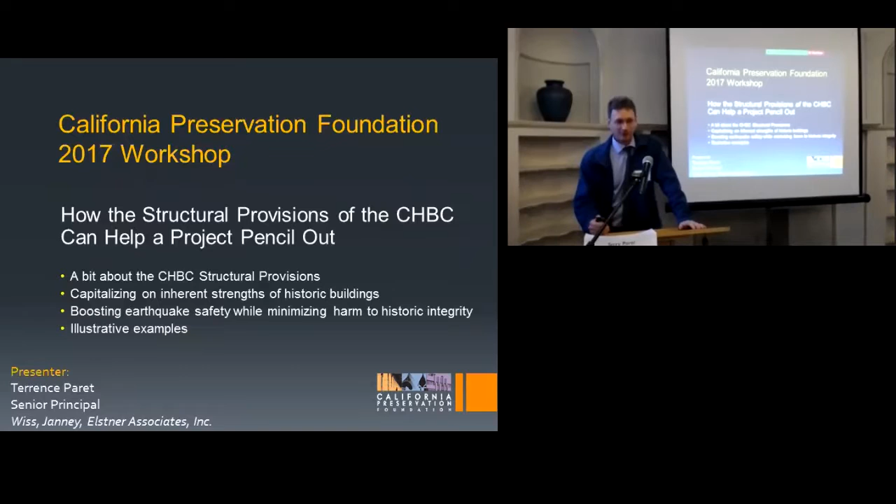That's exactly how I'm going to address the global subject. I will tell you at the outset that I don't have a particularly prescient set of messages for you today, because I think the messages are pretty obvious. These aren't things that I've invented.

These are strategies for achieving success in seismic projects on historic buildings that involve different ways of making things less expensive. It should be very clear from the outset that the more structural intervention we do on historic buildings, the more it's going to cost, the less likely it is to pencil out. So the practical reality is that we should target all our energy on figuring out how to reduce the level of structural intervention that's required.

Luckily, the CHBC gives us lots of ways to do that. As part of that, we need the entire preservation community to understand that preservation is not subordinate to seismic safety. It's often taken to be subordinate on real life projects—we see it all the time—but it's not subordinate. The reality is they're equal partners in things.

The reality is that engineering for seismic safety involves an interaction between seismic safety and preservation. Even in the engineers' quarters, where there ought to be an interaction, there needs to be kind of a handshake between the two, and I think unfortunately there isn't.

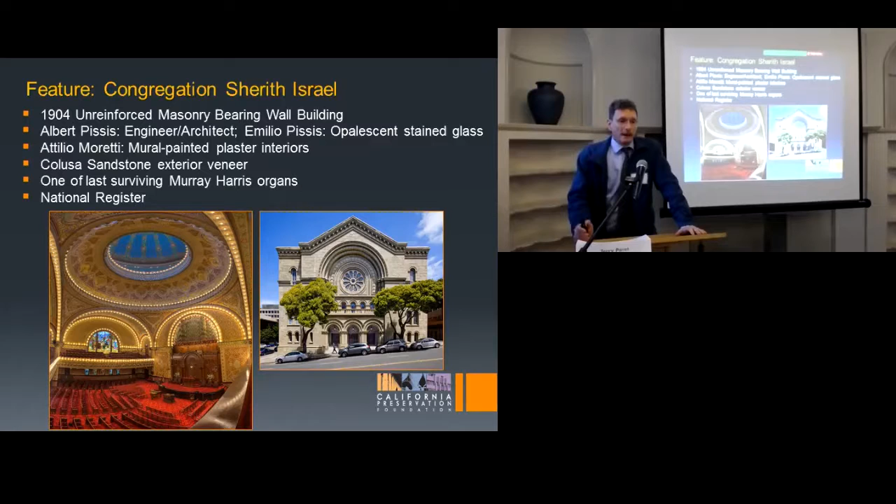Without reading through all its merits, I'll point out that the image on the left could have been taken either before or after the work we did. We didn't touch this—anything you see in this image was really not touched during the seismic upgrade. This building is now compliant with city requirements. There are ways to make this work in real life.

Also, the Hibernia Bank building—both these projects, by the way, are just completing right now. Again, the image on the left could have been taken either before or after the seismic strengthening work. In both these buildings, something like 70% of the volume is contained in these giant halls—the sanctuary in Sherith Israel. We stayed out of those areas, and as a result these projects work. They were successful from beginning to end, and they were cost effective.

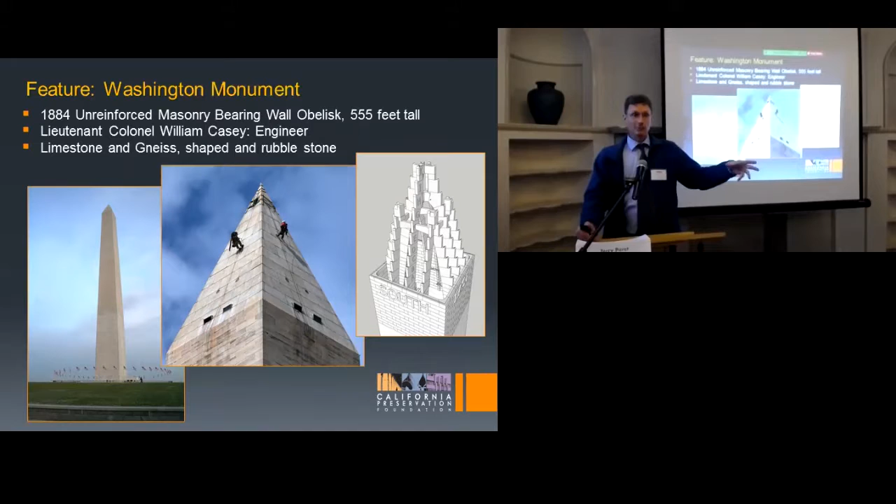Now, the Washington Monument, similar in a different sense, is not subject to the CHBC, obviously, but there are certain things we did on this project that I think are relevant and can be done under the CHBC, so I'll mention those as we go along.

Okay, look—a few things about the CHBC structural provisions. There's going to be a little overlap here between myself and Alan, but I'll try to pop through those things pretty quickly.

On the first slide, it tells you where the structural provisions live: chapters 1, 2, 7, and 8, or at least the structural requirements.

What's important here is, as Alan said, to understand how to read the CHBC. It's not our job to go fishing around in the CHBC looking for requirements that appear to apply to our project. That's not how it works. You start in chapter 1 and figure out where chapter 1 directs you for the project you're involved in. If you fish around and try to pull out provisions that appear applicable, you're going to be doing more work on your building than you actually have to, because there are things in there that appear applicable to lots of projects but aren't.

So start at chapter 1 always and look for the charging language, which in some places is obviously absent. Which is interesting.

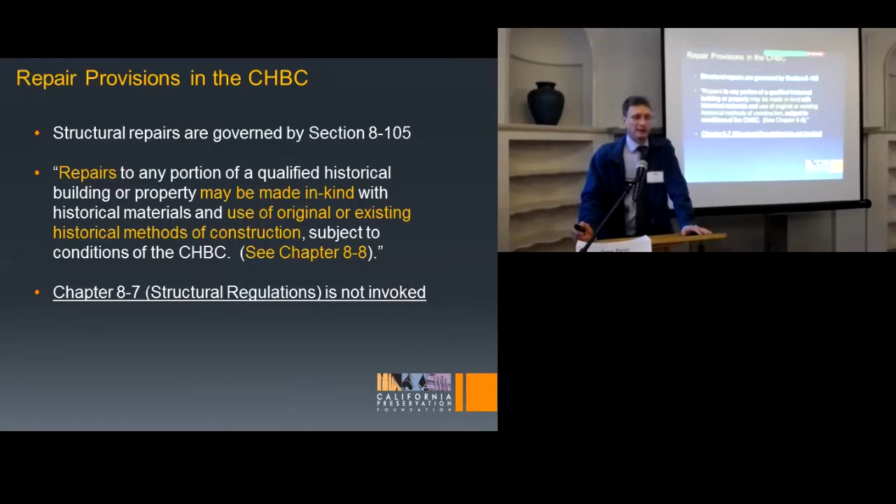Structural repairs, I think Alan already mentioned this. You can make them in kind. That's it. You have a structural repair project in a historic building, you can make them in kind. You are not required in any way to go to chapter 7, where the structural regulations reside in the CHBC.

Unsafe conditions, Alan already mentioned as well. Again, it's important to understand two things, and I'll emphasize Alan's point because I think it's a great one: don't let engineers or building officials tell you that buildings are unsafe under the code because they don't comply with the seismic requirements. That does not make a building unsafe. In any case, with respect to unsafe conditions, you can just remediate those unsafe conditions and you do not have to go to chapter 7 of the CHBC.

Voluntary strengthening is also a fascinating part of our CHBC. It's important to note that just because you're doing voluntary strengthening, you don't end up in chapter 7, in the structural regulations. There's no path to chapter 7 in chapter 1.

It's very clear, however, that the code does say that nothing in these regulations shall prevent voluntary and partial seismic upgrades when it's demonstrated that such upgrades will improve life safety and when a full upgrade would not otherwise be required. The point of that provision, in keeping with the general philosophy we use in these projects, is that if we target critical vulnerabilities in historic buildings when looking to seismically strengthen them, and limit ourselves to critical vulnerabilities, we can save a heck of a lot of money and reduce a heck of a lot of intervention, and the code explicitly allows us to do that.

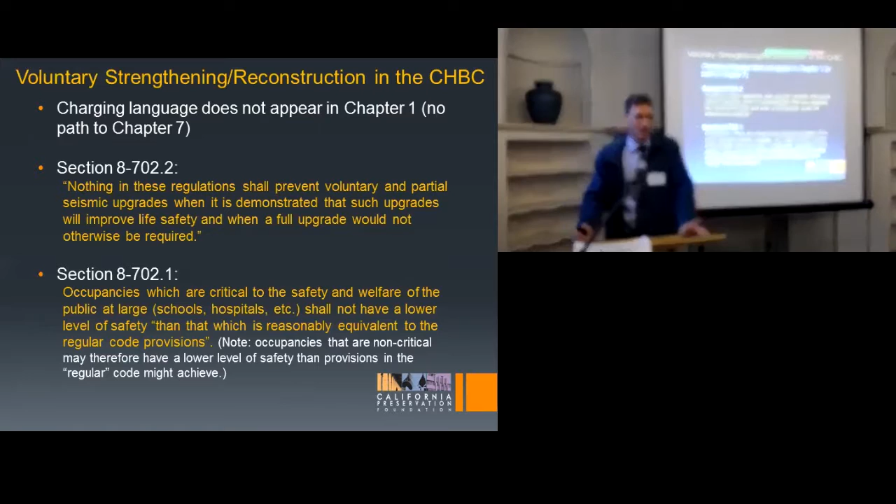On a voluntary basis, when we're involved in a voluntary strengthening project, we don't have to do everything. If we can solve 80% of the problem for 20% of the money, why wouldn't you just do that and stop there? So anyway, it's an important lesson. The code allows us to do that.

With respect to change in use, as you probably are aware, many people consider change of use as a trigger for upgrading buildings. It is a trigger in the CBC, but it's not a trigger in the CHBC.

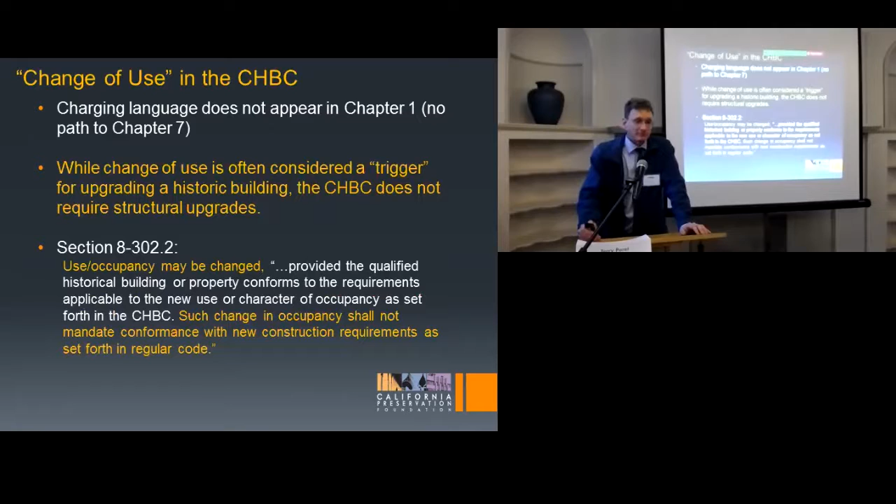Additions, similarly, I think the lesson with additions, if you read these provisions, is that you should try to keep your addition structurally separate from the historic structure, because if it's touching it and either takes load from it or adds load to it, you wind up with all sorts of problems. The language is pretty clear in the code, and I think the lesson is pretty clear: if you need to make an addition, keep it structurally separated.

Mandatory strengthening is where I actually wish the CHBC had slightly better language in it. But understand the motherhood language: for mandatory strengthening, you have to go to Chapter 7. Really, there's no other place to go in the code, even though the code doesn't actually say you have to go to Chapter 7 - we infer it because there's really no other way to interpret it. But Chapter 7 clearly says that the intent of the chapter is to encourage preservation with the objective of preventing partial or total structural collapse, such that the overall risk of life-threatening injury as a result of structural collapse is low.

So again, it's kind of focusing us on this notion of structural collapse. It's not asking us to look at every little item in the building that might fall down.

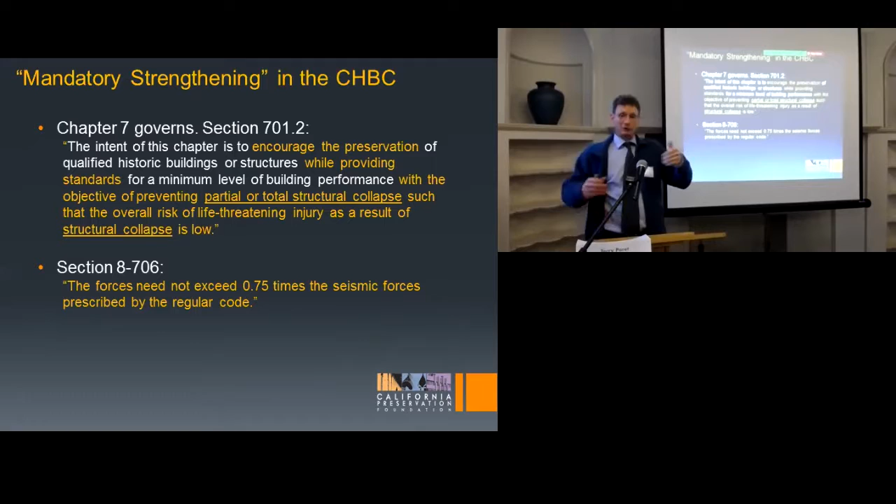It's not saying you shall prevent all brick fall. It says you shall prevent structural collapse, such that walls collapse and floors thereafter collapse. Not local brick fall—that's not really on our radar.

In any case, the CHBC allows us to reduce design forces from the standard code to 0.75 times the forces.

Let's talk about the heart of the talk, which gets into capitalizing on inherent strengths of historic buildings. To capitalize on inherent strengths, the structure must have inherent strength. If we have a structure that doesn't have any—is there such a thing? No, there's no such thing as a structure that doesn't have inherent strengths.

Knowing that every structure has some sort of inherent strengths, our job is to identify them, quantify them, because as engineers, everything has to be quantified, and to leverage them in the final design.

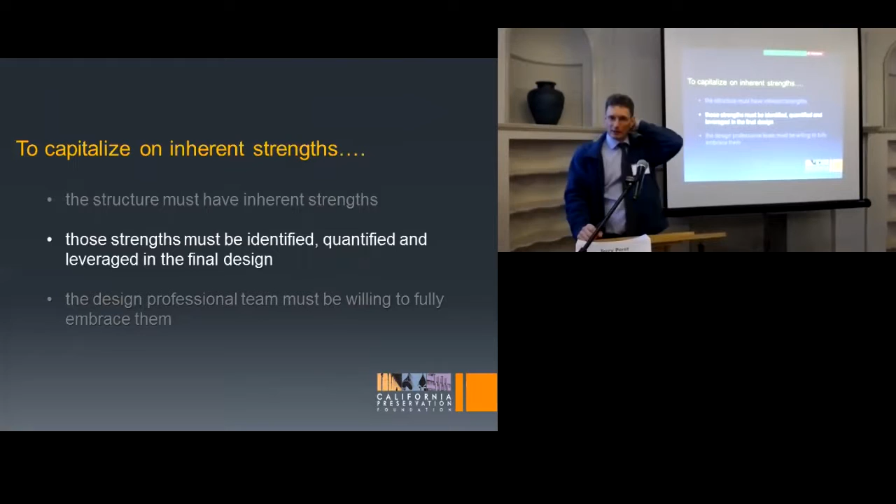I'll give you some examples about leveraging inherent strengths, because you don't always get exactly what you want in a historic building, and some historic buildings have fewer inherent strengths than others. But our job, if we want to help projects pencil out, is to figure out what they are. Don't give them too little credit, don't give them too much credit, but give them credit.

In order to capitalize on inherent strengths, this last bullet is perhaps the most important: everyone on the team has to embrace this philosophy. If you have one rogue team member—even the municipality, I consider a team member here—they're either with you or against you.

Everybody has to be committed to the notion that inherent strengths in historic buildings are reusable, that we can use them in a current scheme of seismic resistance. We just have to figure out how much we can use them and where. But if we decide at the outset not to use them, there goes the project.

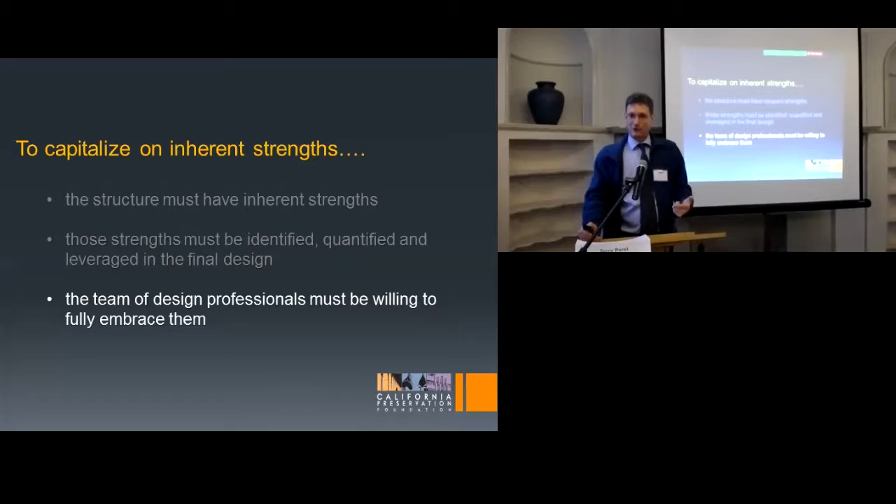So, does the structure have inherent strength? Yes—there's really nothing else to say. So how do we go about identifying, quantifying, and leveraging the inherent strengths in a historic building?

I've itemized a few ways of doing that here—again, none of these things are things you don't already know. But I'm going to show you some pretty pictures while explaining them, and maybe that'll make it up to you that I'm telling you what you already know using nice pictures.

First, archival research. Historic buildings—the older they are, the more historic they are, the more stuff there is out there that can tell us about them. Not just what they were used for, but from a structural perspective, things engineers can actually leverage if they knew about them. Engineers may not be great at research, but somebody's got to do it. You have to figure out who on the project team will be charged with that.

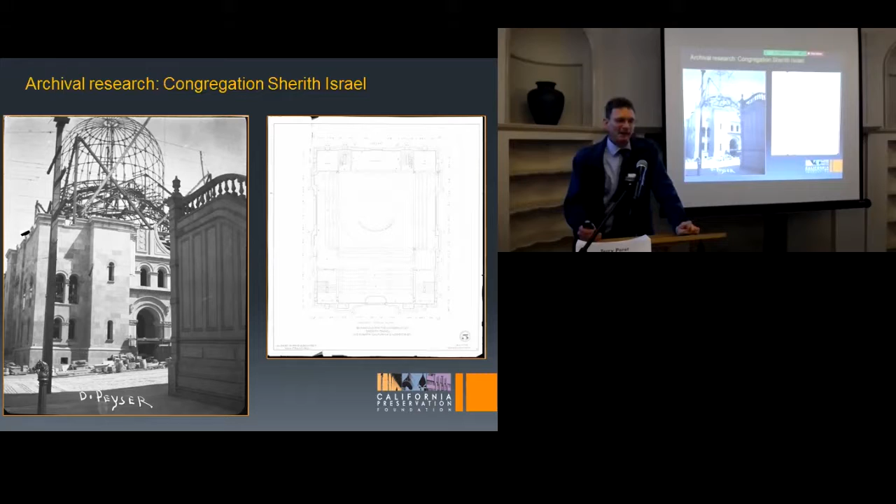We did have a few drawings. On the right is an image of an Albert Pissis architectural drawing. We had a handful of Pissis's architectural drawings that showed us where the structure was, but didn't really define the structure very well.

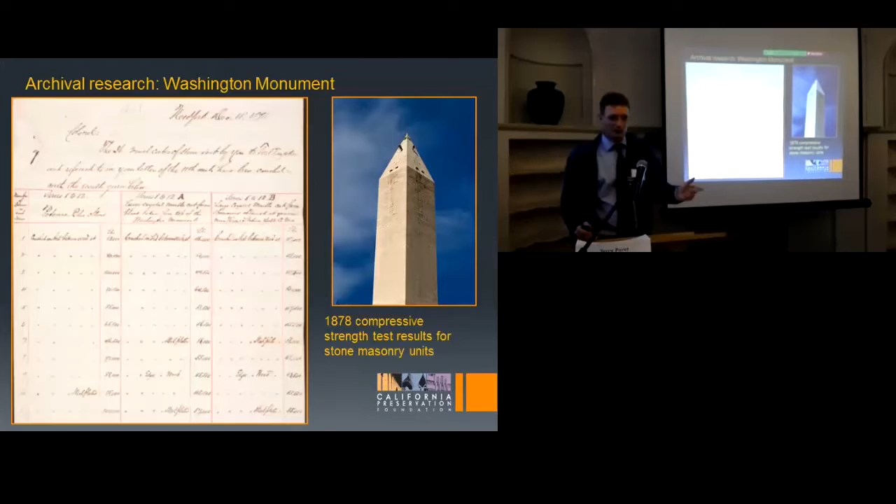On the Washington Monument, archival research, as you might imagine, was—well, you could retire doing archival research on the Washington Monument. Just great, great stuff available. The image on the left is a sheet that records the compressive strength of the stone used in the monument. Just a ton of really, really cool stuff.

This is one of my favorites, but you kind of have to be a geeky engineer to appreciate it. In the old days, engineers didn't have calculators—they could do long division, but no calculators, no computers. Engineering methods were largely graphical. This is one of Lieutenant Colonel Casey's sheets, the design sheet for the Pyramidion on top of the Washington Monument.

It's really hard to see here, I know, but you can see a bunch of paraboloid type shapes. This is his graphical solution for how the loads get transferred and carried in the Pyramidion for wind out of plane.

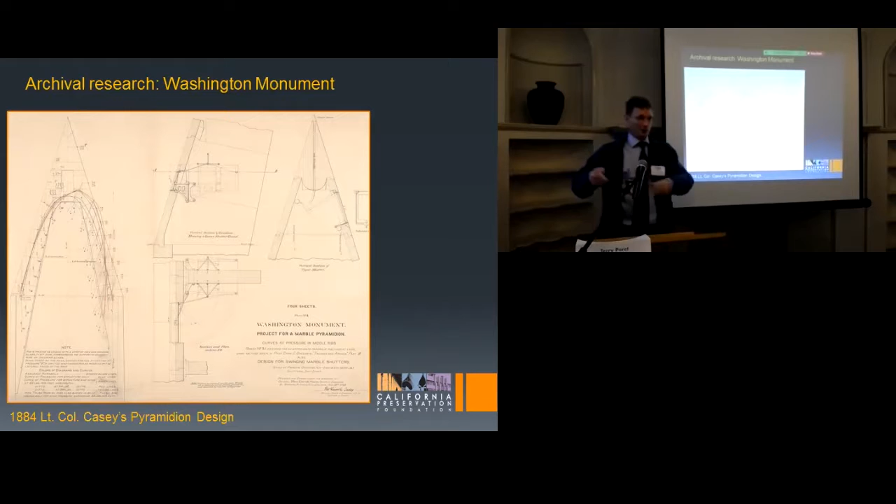What I love about it is there are notes on here. If you follow the chain, as all archival research does, you figure out he's thought about what other means of structural strength are needed if wind pressures exceed certain amounts. He references certain textbooks, still available, that we were able to find and reference, so we understood what he thought about the design at the time. That goes for Lieutenant Colonel Casey and for Albert Pissis. There were a lot of really smart engineers back then who designed very competent structures without benefit of computers.

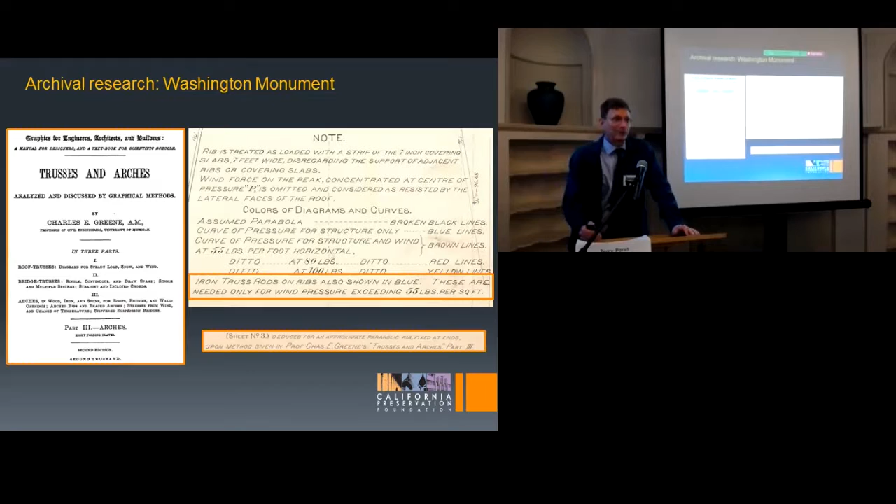Okay, so a little more about what we can do to establish our inherent strengths and quantify them. Obviously field observation is a huge part of it. You might find yourself in some awkward positions at times, but you can learn a lot.

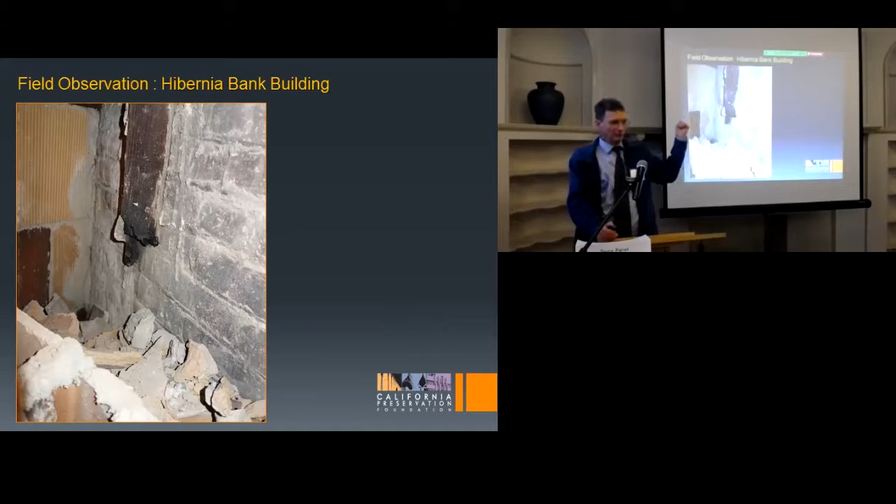These are images from the Hibernia Bank building. I suspected when we first became involved in that project that the partitions and the like had all been wood framed prior to the earthquake and conflagration, but I had no proof of it because we had absolutely no drawings for Hibernia. But in rooting around in the building, I found burnt timber that I think was part of an old partition. I think at Sherith Israel, everything is done in wood also, and I think Pissis did this building in wood but made it fireproof after the conflagration by rebuilding all the interiors back in hollow clay tile, which was lovely.

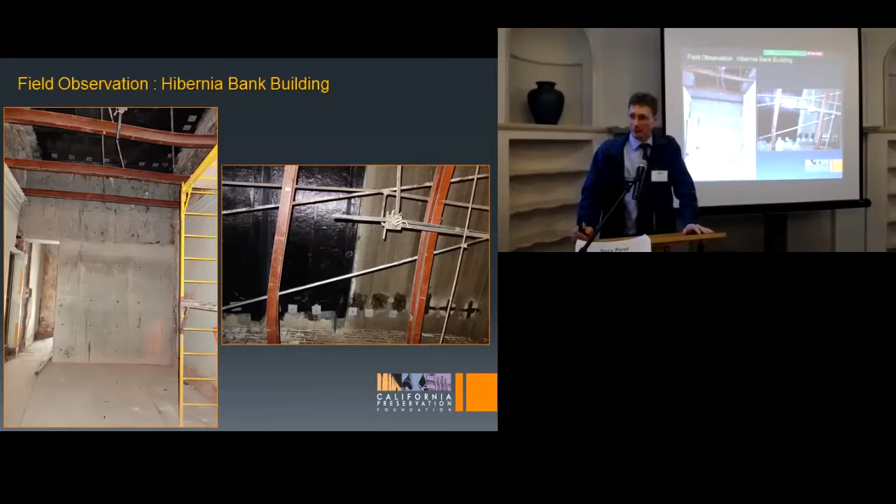We also found, very interestingly, other signs from the conflagration. These are steel beams in an area I call the bookend, that we'll describe in more detail later. These steel beams are actually warped by the fire. Our conclusion is the steel beams heated up, got weak, the material weakened, and as they expanded they were not allowed to by the masonry walls, so they buckled.

The same thing happened up in the attic. The main roof of Hibernia is supported by steel trusses. What you see here is the bottom chord of one of these steel trusses actually bent. Somebody later came in and infilled the area with concrete to prevent it from buckling further, which is actually quite a clever solution. We don't know who did it or when.

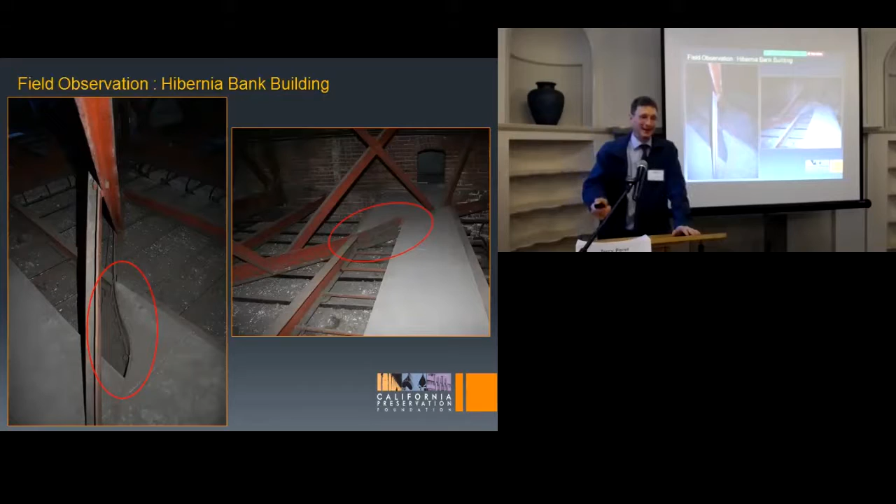Too often these testing agencies will come out to your site, do tests, give you numbers that don't make sense, and now you've spent a bunch of money and have numbers that don't make sense. It's very important to make sure this stuff is calibrated before it takes place.

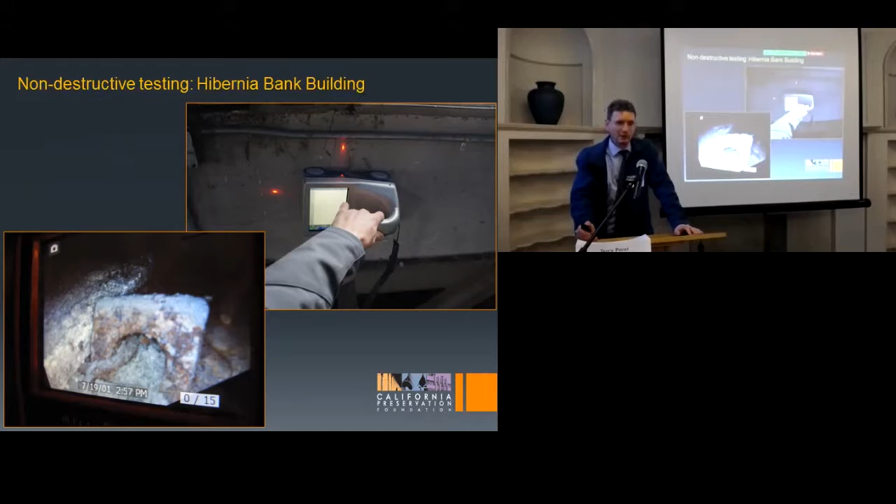We go to great lengths to use non-destructive testing in our projects where applicable. The image in the upper right is ground penetrating radar. It works wonders on things. At Sherith Israel, we were able to locate all the veneer anchors and their pattern. Sherith Israel has a Colusa sandstone veneer, and we were able to understand whether the veneer was appropriately anchored and supported or not. But perhaps more fun, here's an image of a gentleman running a GPR over the cornerstone for Sherith Israel.

There had been a long reported rumor within the congregation that there was a time capsule buried behind the cornerstone. In concert with the facility, we arranged to do some ground penetrating radar and see if that rumor was true. Lo and behold, it was, and the time capsule was right behind the stone in the area outlined by the orange box. So we measured out where that was, went to the interior, tore out some of the partitions, yanked out the time capsule, and now they have it, which is pretty cool.

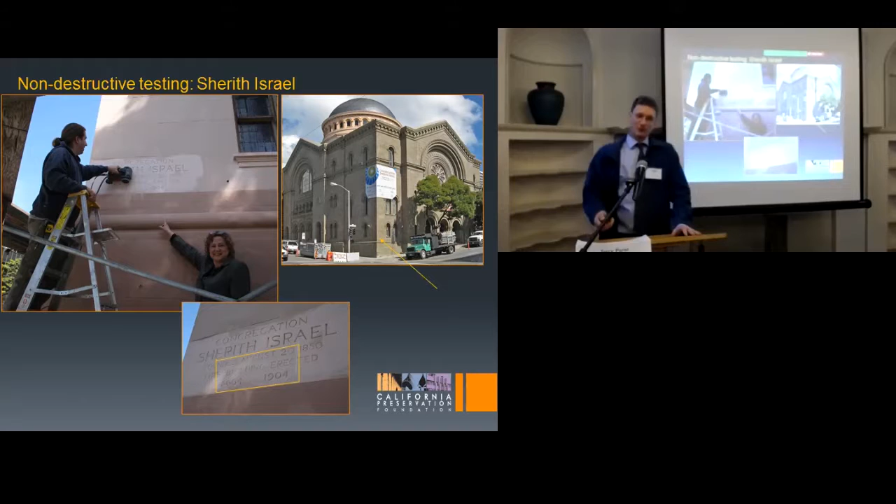And all without doing any damage, right? We obviously didn't want to damage that cornerstone. Okay, that's destructive and non-destructive testing in concept.

You have to be willing to, sometimes you've got to do some damage to stuff. And you end up with a matrix of what's the biggest bang for the buck. Where am I going to get the most information for the least damage?

This particular building was not on the city of San Francisco's unreinforced masonry building list. So we didn't know at the outset of this project, was it an unreinforced masonry building? Was there a steel frame hidden somewhere in here? We absolutely had to find out. This was a key issue in the tree of decision making.

So we made a bunch of these holes, and we of course discovered that this is an unreinforced masonry building. There is one portion of the building, kind of an internal second floor that's supported by cast iron columns, but the bulk of the building is all unreinforced masonry.

Don't be scared to drill holes. Sometimes you can get a lot of information from them. Just be careful how you do them.

Benchmarking is something that I really want to emphasize for you guys, and it's pretty engineering-y. But the point is to try and figure out how to use the fact that these structures are historic to your advantage. Because they're historic, they've been through a number of loading events - they've seen large crowds over time, they've maybe seen earthquakes, they've seen big windstorms. Those loading events can help us quantify what the structural characteristics of these buildings are. How good are they? How bad are they? Where are they most vulnerable?

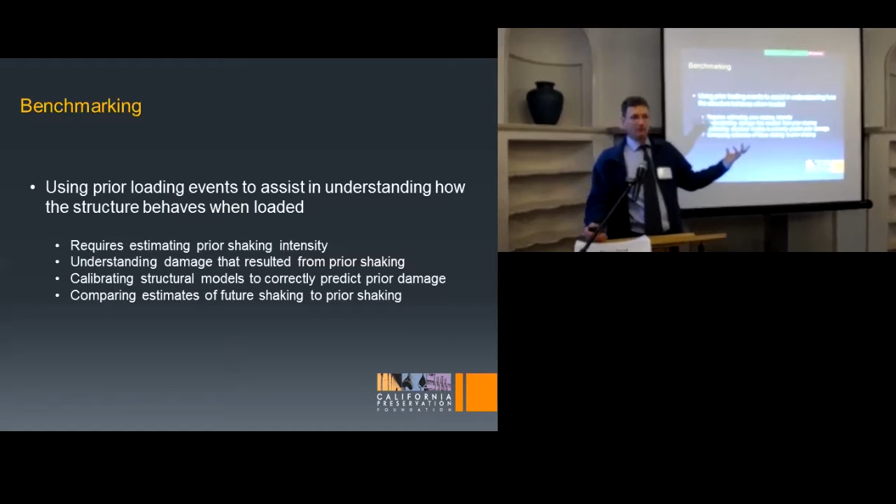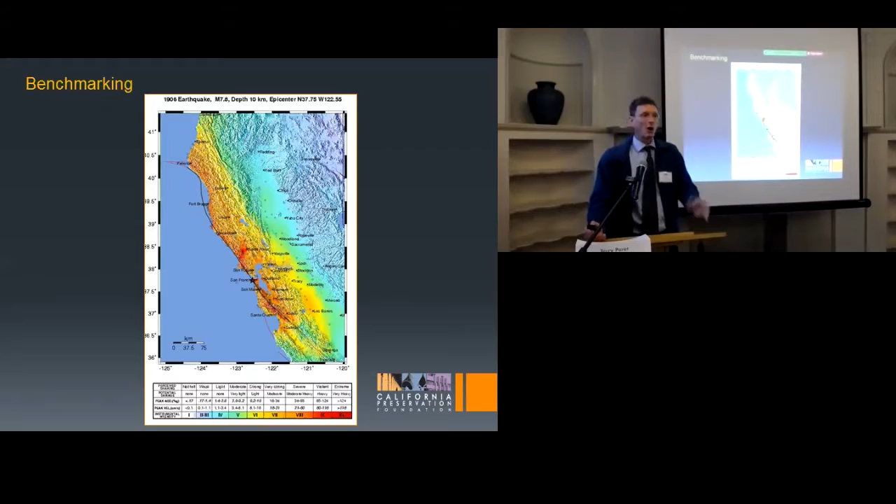So there are ways, particularly in earthquake land, of leveraging this information. For San Francisco, we have lots of information from the USGS that helps us characterize what the intensities of ground motions were back in 1906, which for any building that was around that time and went through it, can give us an awful lot of information, both conceptually and on the analytical side.

Anyway, benchmarking - benchmarking and archiving kind of go back and forth, everything's hand in hand. You look at photographs as part of the benchmarking process if you have photographs available.

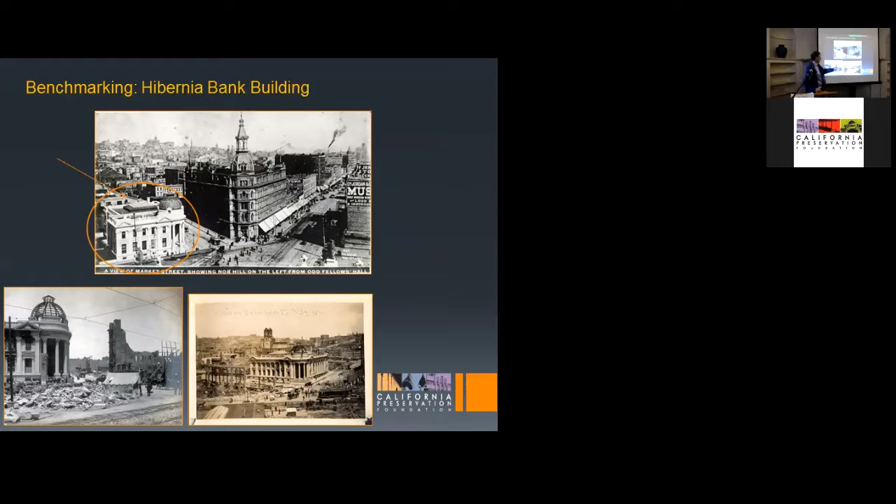Here's Hibernia. I just want to point out, in the top slide, this is Hibernia before it was expanded in 1904 - notice this building across the street. On the lower part of the slide, there are two images of Hibernia after the fire and of the neighborhood, and you'll see that the building across the street is down as well. Just keep that in mind for a second.

But the images of Hibernia really helped us understand how it worked in 1906. What we see is that structurally, it really wasn't damaged by the shaking, it was damaged by the fire - lots and lots of fire damage. Photograph after photograph demonstrates that, we have this from all sides.

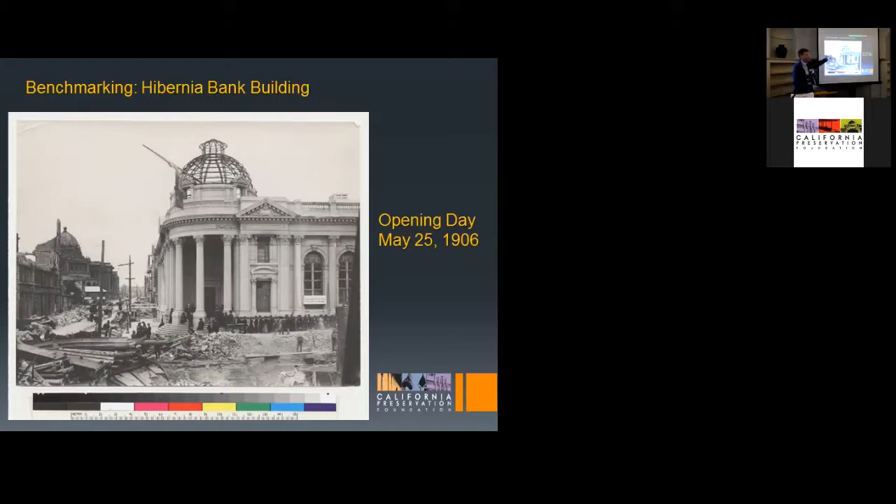We also know from archival research that the building reopened something like five weeks after the earthquake. People were able to get their money out, which is pretty good information if you're trying to figure out how earthquake resistant this building is - they didn't have the whole roof collapse inside, hidden damage where nobody could get in and get their money. We found the USGS actually had some descriptive information on what happened to this building after the earthquake, so we utilized that. This is one of the images that I love.

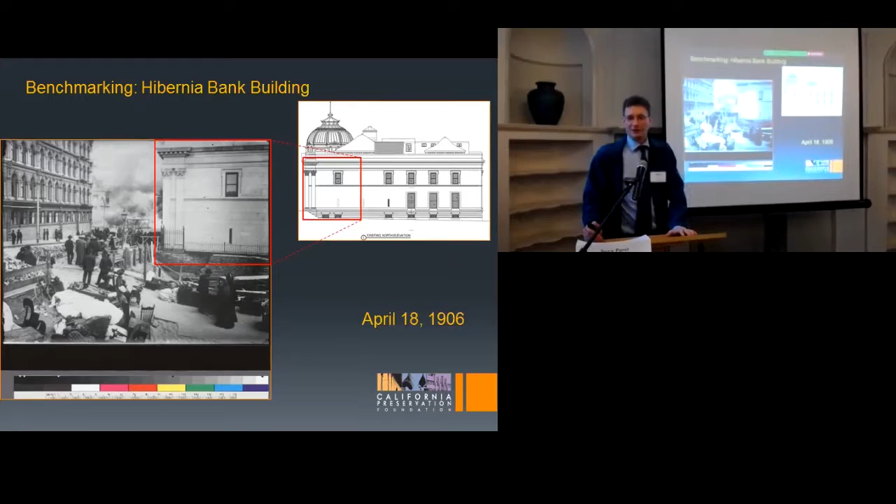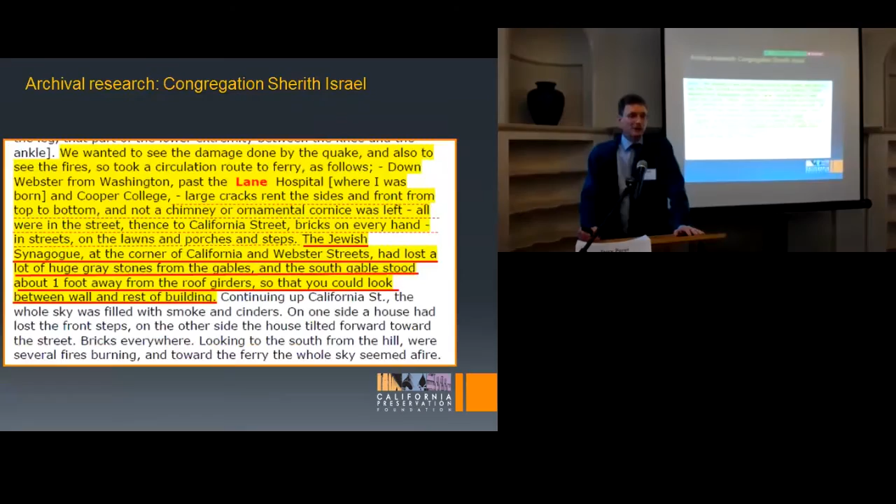Sherith Israel was damaged. The gable end walls were damaged. You can see some of the coping stones on the ground, and a lot of them missing from that gable. There's lots of information in the Bancroft Library on Sherith Israel, some of it eyewitness records, telling us what was visible from the street at the time.

This is all extremely valuable stuff for engineers. If you want the project to utilize inherent strengths, you've got to dig this stuff up, or it's just going to be guesswork. The more you ask engineers to rely on instinct rather than real information or numbers, the less comfortable they'll be saying 'that's pretty good.' If you want engineers to say that, you've got to give them some meat.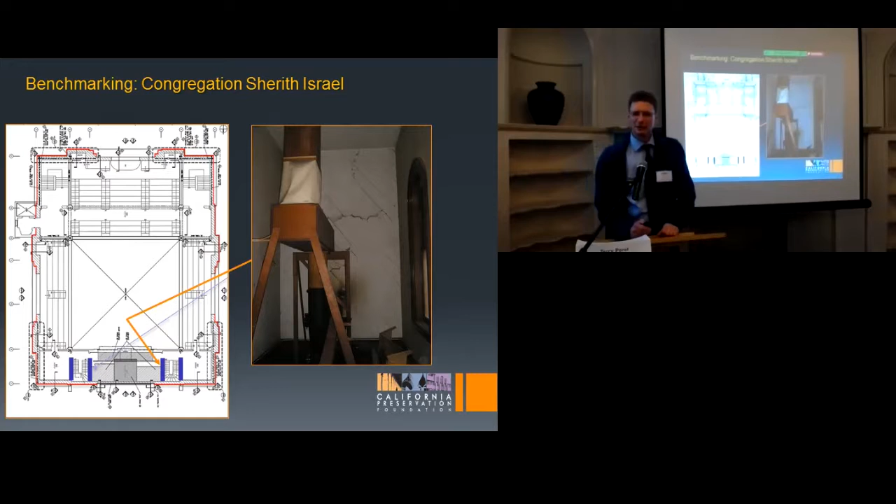So in Sherith Israel, again, part of the benchmarking process is doing physical investigation. I won't explain the structure in detail, but these blue partition walls show 1906 earthquake cracking. Sherith Israel is kind of a museum - they never really repaired an awful lot of the 1906 damage.

Same thing up in the drum. These piers all had extensive cracking in them. Behind this pier is some of that really spindly steel I showed you in that earlier photograph. There's also damage to another masonry gable end wall in the building, which told us that the masonry gable end walls are quite vulnerable.

Here's the only thing I have on the Washington Monument, which is important for benchmarking purposes. The reason I put it in here is that for us this was a zero cost solution. Benchmarking enabled us to tell the National Park Service - a great client, by the way - that we don't think the tallest unreinforced masonry obelisk in the world is all that seismically vulnerable. So you don't have to do anything to it, you don't have to strengthen it. It was largely on the back of benchmarking that allowed us to tell them that with confidence.

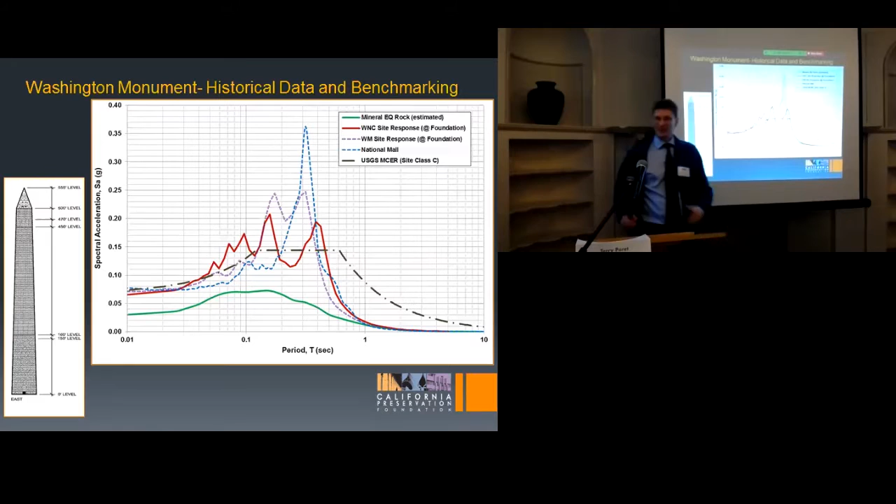There were some slight improvements done to the Pyramidion during the repair work, but on this slide - which you're probably not interested in all the detail - the black dashed line represents the forces that would be imposed on a building in the maximum considered earthquake. The purple and blue lines represent the forces imposed on the monument during the Mineral earthquake in 2011. So if it already made it through an earthquake that's more intense, with more force than the design event, why would you strengthen it?

So we rely a lot on the seismological information. I'll skip that one. But essentially, this stuff all goes into - well that was a conceptual look at a plot - all the data goes into computer analysis where we compare the stresses in the structure under the event it's already been through versus the stresses in the structure under the event we're supposed to make it good for.

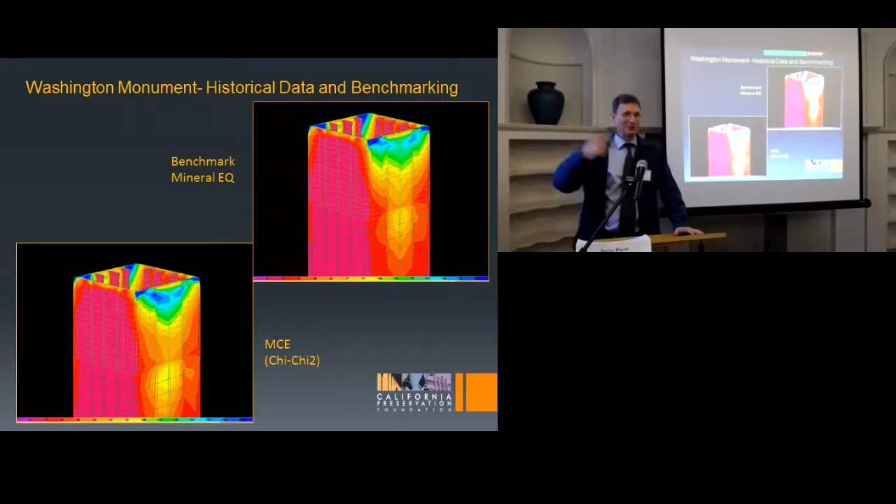If they're pretty similar, that's gold for an engineer, and it can turn into gold for the project as a whole if it saves a lot of intervention. These kinds of analyses can easily be done. You can make lots of pretty pictures with lots of information to calibrate your models and show, hey, we can actually predict the damage that happened, which is exactly what we tried to do in the Washington Monument. We created models, subjected them to representations of ground motion for the mineral earthquake, and tried to see if we were predicting the damage that actually happened.

Okay, the last major part of this presentation - how am I doing on time, by the way? Oh, awesome, because this is a big part. But yeah, that's almost perfect.

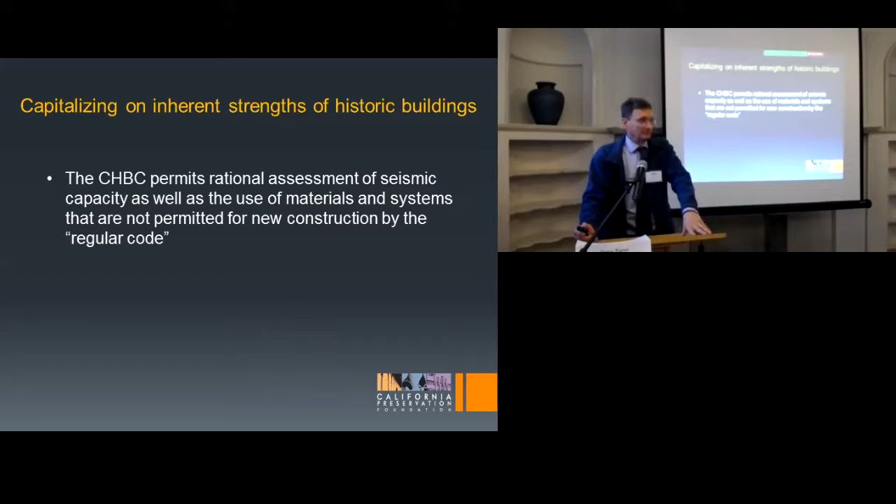So, capitalizing on the inherent strengths of historic buildings. As I kind of implied before but didn't say expressly, the CHBC permits rational assessment of seismic capacity. We don't have to adhere to all sorts of published methods - ASCE 41, which you may have heard thrown around on a bunch of projects, you don't have to use that. If you use rational methods, you can use them. If you use engineering first principles, you can use them. You can use things that aren't even all that easy to quantify.

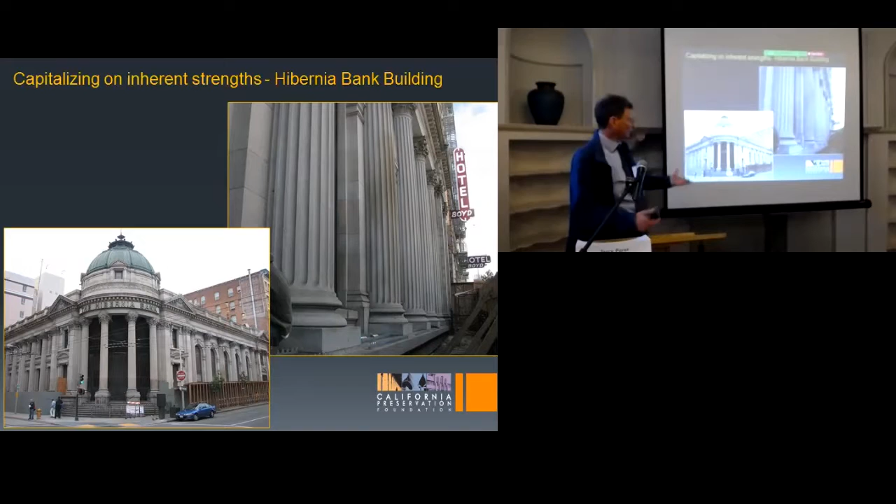Let's look at Hibernia. Here's some images of it - absolutely massive granite blocks. Massive. In fact, these column covers are single pieces of granite, with no horizontal joints in them, as you'll probably notice. And you'll also notice that the exterior walls of this building are just a bunch of piers and spandrels, some of them very tall.

The reality is that when a building like this tries to sway in an earthquake - and it will sway, because all buildings sway in earthquakes, even if it may not look like it - when buildings like this sway, those piers want to rock. Just like when you're trying to move your refrigerator across your kitchen floor and you're pushing a little too high up on it, it wants to tip a little bit. But if you let go, it comes back to its stable position, unless you really, really push it over far.

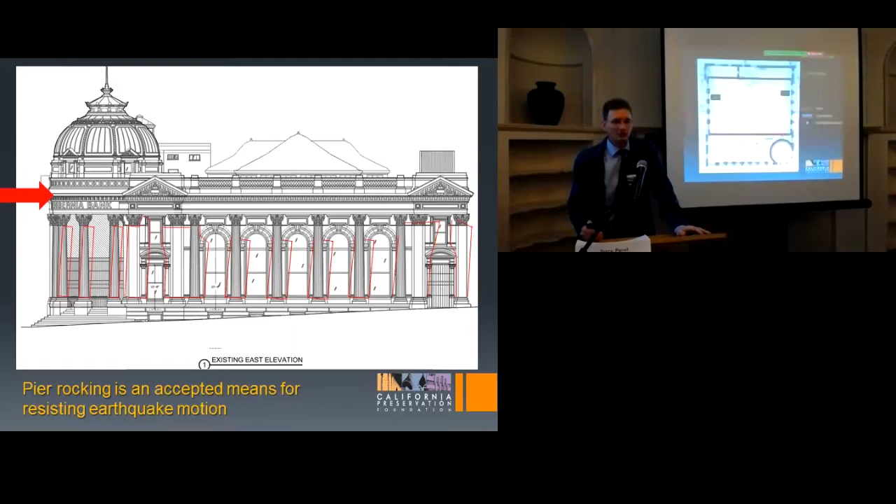Pier rocking is a perfectly acceptable means for resisting earthquakes. We are allowed to rely on it. As engineers, we don't have to say those piers are rocking, I can't do that. No - pier rocking was indispensable to making the Hibernia Bank building work with minimal disruption. So for your benefit, I'm going to show you exactly how beneficial it was.

This is a floor plan of Hibernia, and in red I show the walls that are brick, or the portions of the walls that are brick. In gray, I show the portions of the walls that are granite. In the north-south direction, depicted up and down the sheet, you can see that those rocking piers are responsible for resisting almost 50% of the total required load for upgrading this building and making it compliant today.

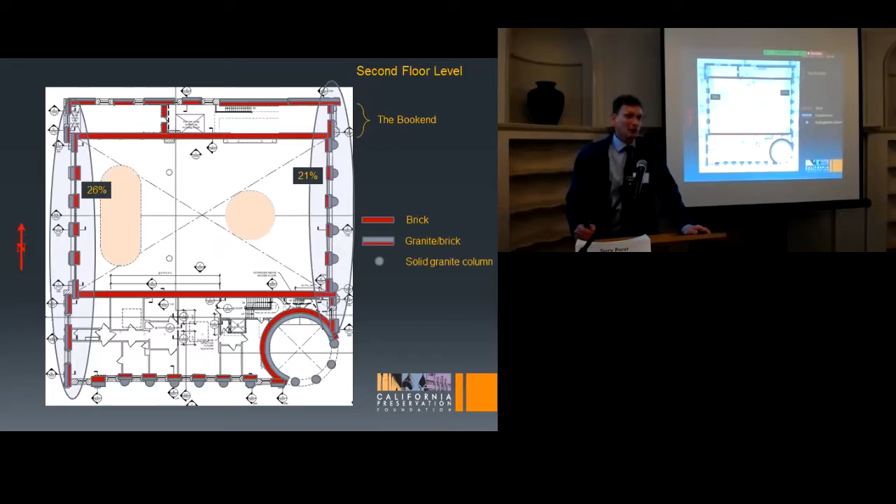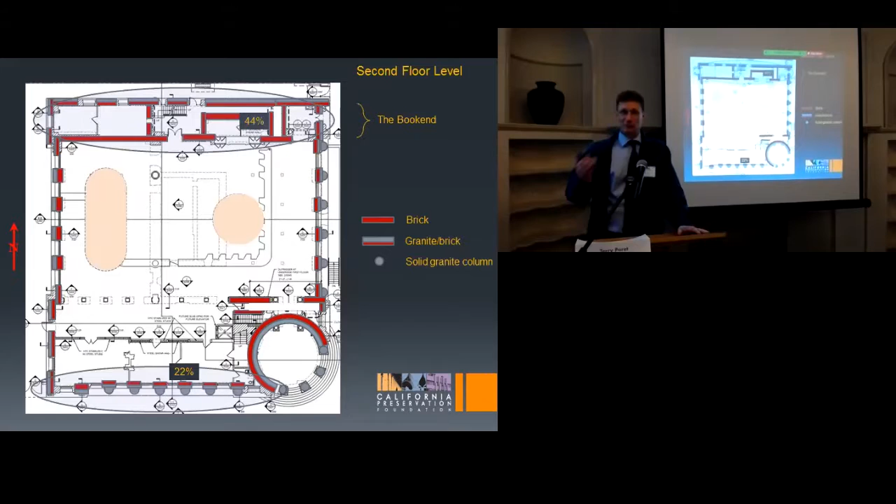So there's a couple ways to look at that. If they resist 50% of the required loads, I get to not put in 50% of this new structure that I would otherwise be required to put in, so I can save myself tremendous disruption. If you look in the other direction, those values add up to almost 70% - almost 70% of the forces required are resisted by existing structure. How great is that? It's fantastic if you're looking to install less new stuff, if you're looking to do less damage.

I'll tell you, looking at it in reverse - and I don't always love to do this - prior to the time we became involved, there was another engineer on this project. That engineer failed to recognize that pier rocking was an acceptable, at least partial, solution to the seismic resistance of the building. He specified the installation of a ton of really thick concrete shear walls all around the property, some in the precise positions I show here. He was going to block a whole bunch of windows and destroy some of the interior of the banking hall. This project would have been a disaster. It would have added a lot of cost, and just from the standpoint of acceptability from a preservation standpoint, just a disaster.

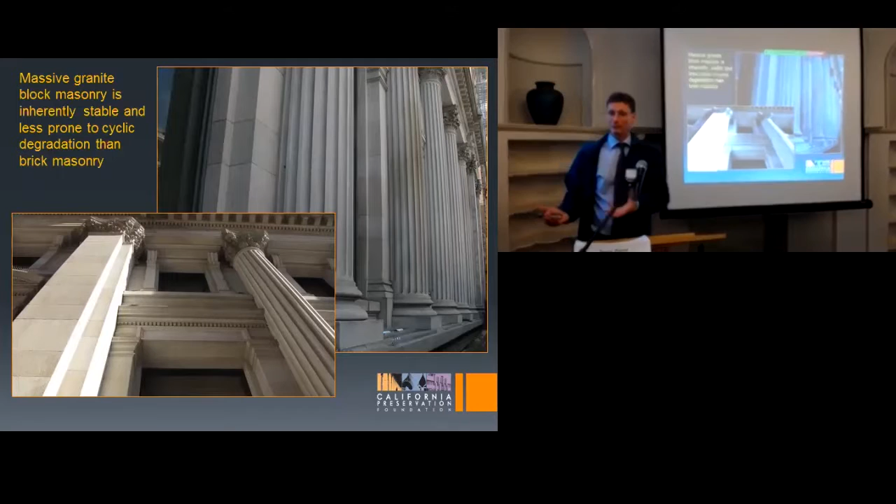Brick masonry, every cycle, really kind of falls apart—you start to shed bricks. It has some less desirable characteristics to it. But massive granite masonry, I don't think you could shake the stuff apart if you wanted to. I mean, these blocks are massive.

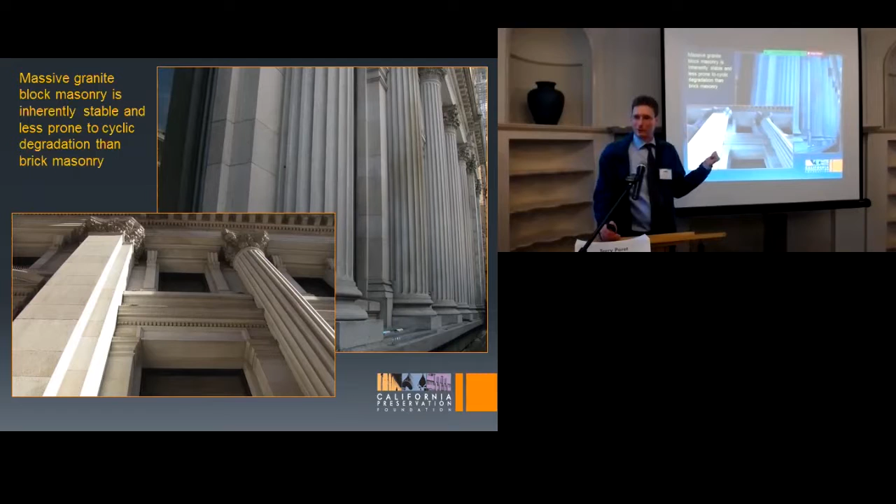We actually took the time to map the general geometries. Some of these blocks are 6, 7 feet long and 2 or 3 feet wide. How are you going to get those things to slip off each other in any earthquake such that you lose vertical support?

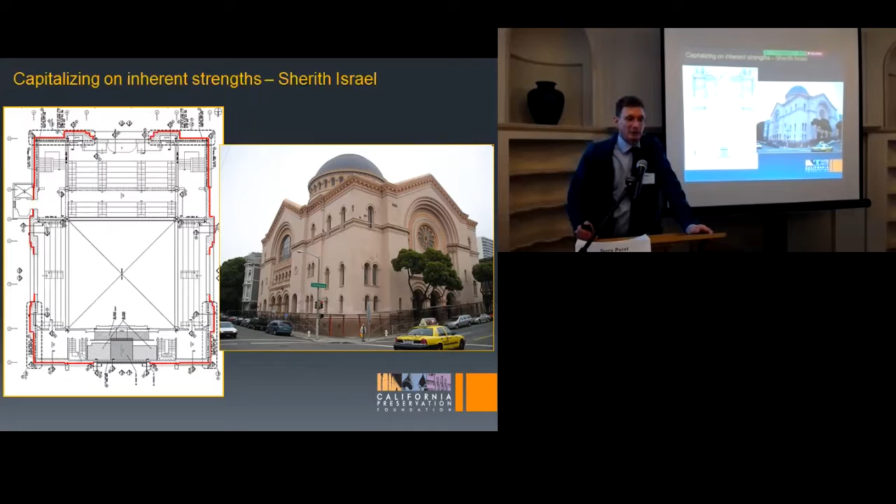I don't think it's possible. Now look at Sherith Israel, a very similar kind of picture. If you look at Sherith Israel from the outside, you see the walls are highly articulated. You see these giant kind of arch shapes out of masonry built into them.

Arches, invented by the Etruscans, popularized by the Romans, are one of the most successful structural types of all times. Why wouldn't we try and take advantage of arches in today's construction? They work. These are sound elements. They may need to be supplemented, they may need a little boost, but they're good. They count for something. We need to identify them and use them. How do we creatively leverage these strengths?

Well, here's an image of Hibernia again. In blue, I show all the areas where there were very significant finishes. No one told us we shouldn't touch that stuff, but you just take one look at it and say, how can I, in good faith as an engineer, specify structure within these areas?

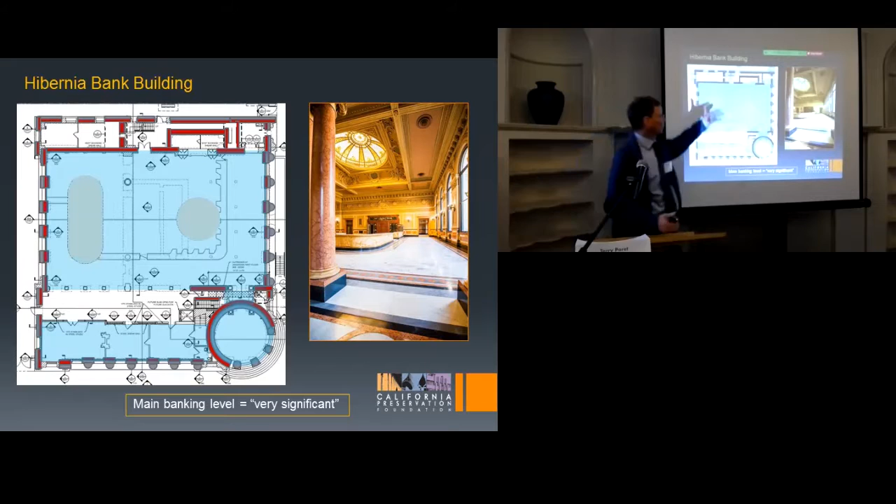So guess what we did? Here's where we put our structure. It took a little extra work, it took a little creativity, but you try and locate your structure to the degree you can. In almost every building I think you can, depending upon the building's flaws. This one happened to start out pretty good, but there are places to stick structure that do minimal, if any, damage to the interiors.

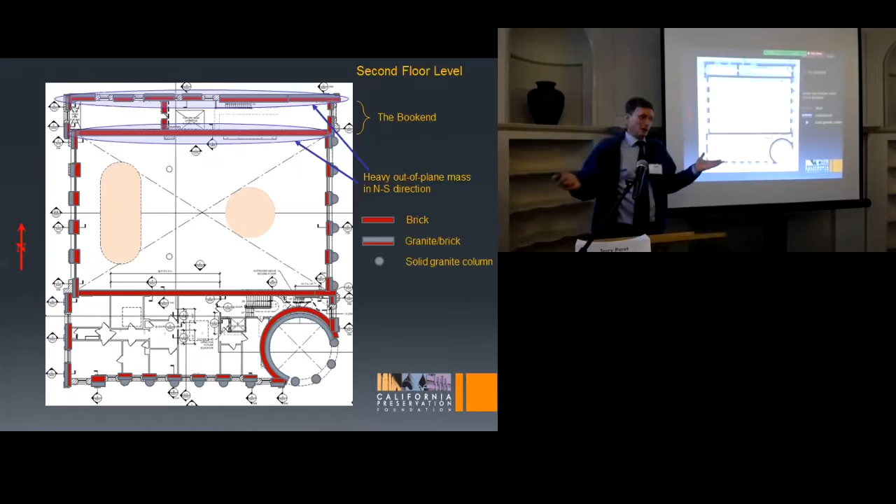So I'm going to explain what we did. Back up at the top of the sheet, in an area we call the bookend that I've mentioned previously, the walls I'm highlighting in the north-south direction don't actually contribute strength or stiffness. These are big, massive, heavy walls that need to be supported all by themselves, not to mention the fact that they help drag the whole building down.

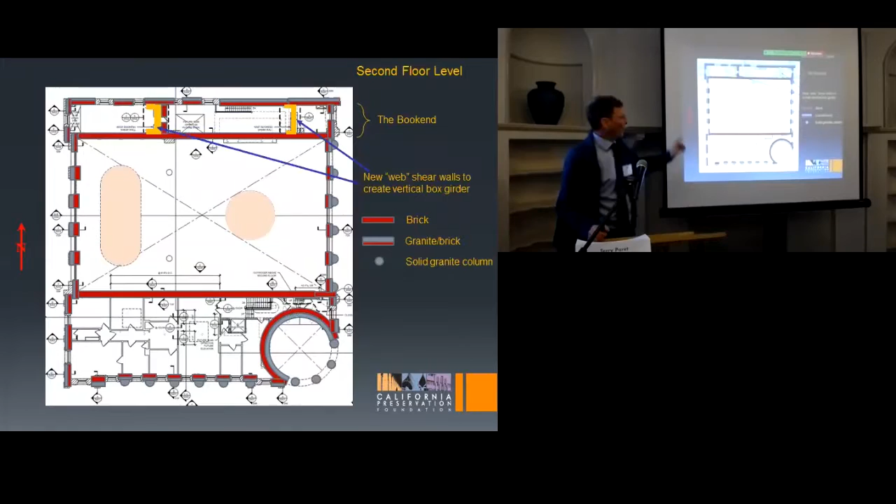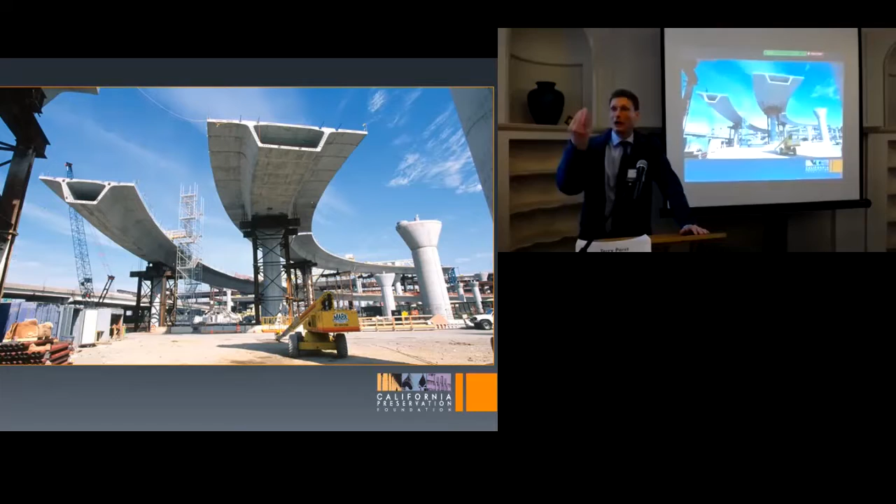There was an easy solution. All we did was stick in these little yellow web walls, that turned this assembly into a box girder. You know what a box girder is? It's a vertical box girder. These are horizontal box girders—look at the way these things cantilever off those piers. Well, our vertical box girder cantilevers out of the ground, but this is the analogy.

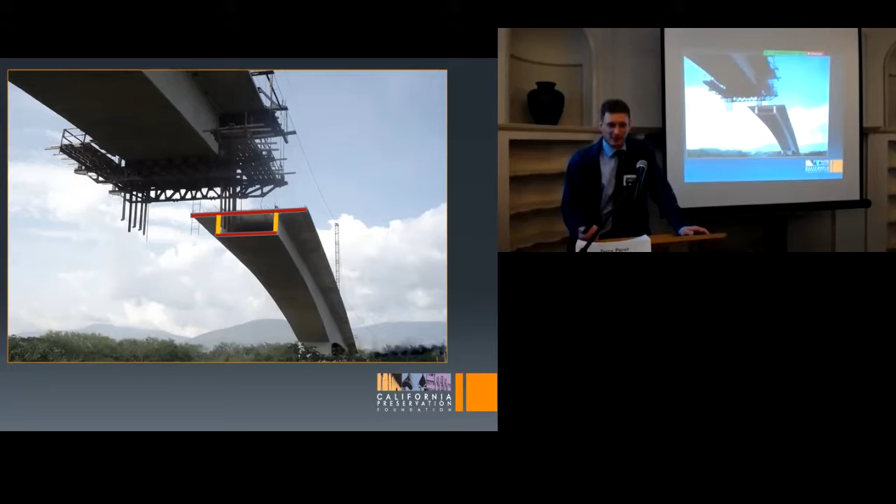With respect to Sherith Israel, brick masonry can be very, very strong. In fact, what we found at Sherith Israel, where prior engineers had said it wasn't strong enough and we needed to put in a lot of shear walls, was that the brick masonry all by itself was strong enough. However, brick masonry, as I alluded to before, isn't all that tough—it degrades in earthquakes fairly rapidly.

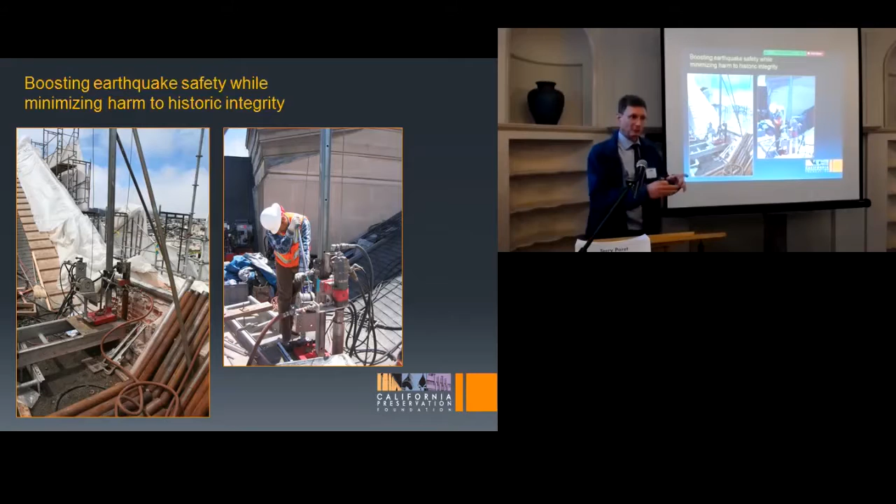In this particular case, we did vertical and horizontal center cores—holes drilled from the roof, going down 60, 75 feet through 3 and 4 wythe masonry walls. You insert a steel rod and fill it up with grout. At Sherith Israel, we put in over 8,000 lineal feet of cores—that's 1.5 miles of cores.

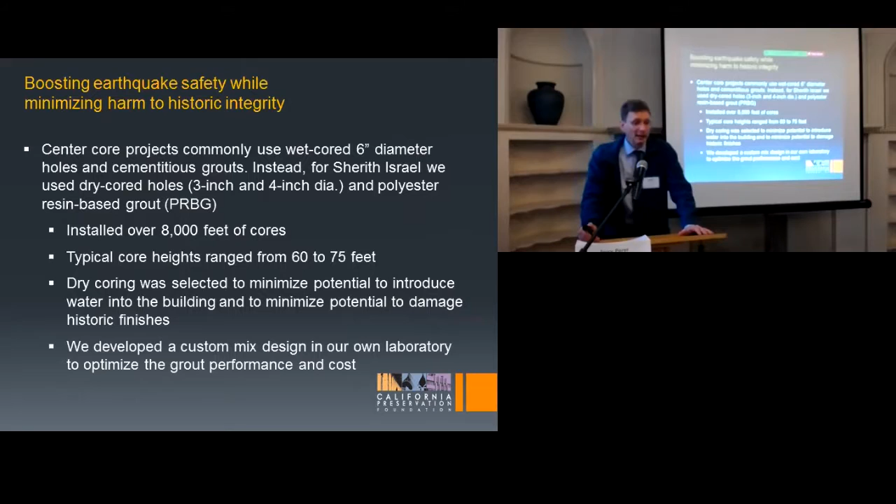We use dry coring so as to not risk damaging those historic plaster finishes inside, and we used a customized mix of polyester grout that actually also has phenomenal properties to it. Here's an image of a center core that we record during the quality control phase. This looks like concrete, but it's not. There's actually a polyester resin.

This stuff is phenomenal because it permeates the brick, it permeates the mortar in the area, it bleeds through the whole system and helps, it strengthens it, even though you're not allowed to officially count on that strengthening. It integrates it, which is really what I said we've used this for.

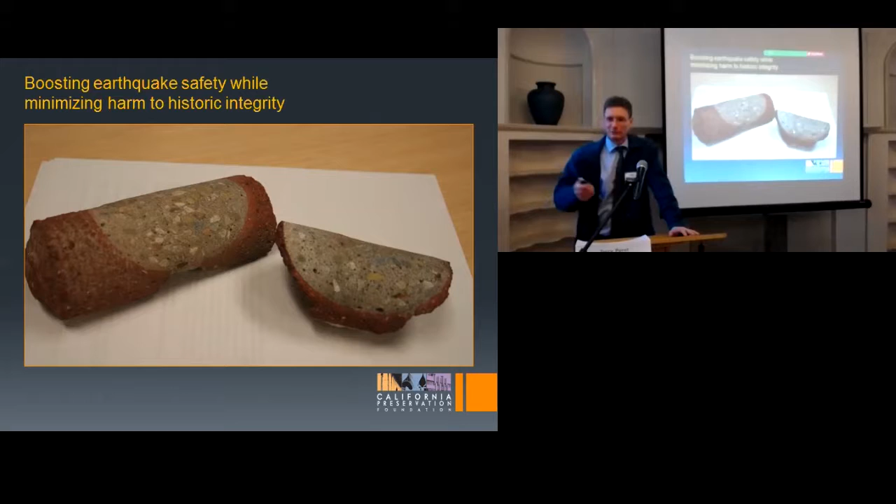It integrates it. Look, in Sherith Israel, how did we take advantage of these big arches I showed you an image of? Well, we wanted to hold onto the arch, because one of the big failure modes in unreinforced masonry buildings is the walls falling out. So while I have these big arches on the exterior, I didn't really have too much to stop the walls from falling out. So we put in some very traditional things like floor-to-wall ties, but also in the roof of the structure, in the attic, we put in a tension tie system, such as you've seen in religious and monumental structures all around the world.

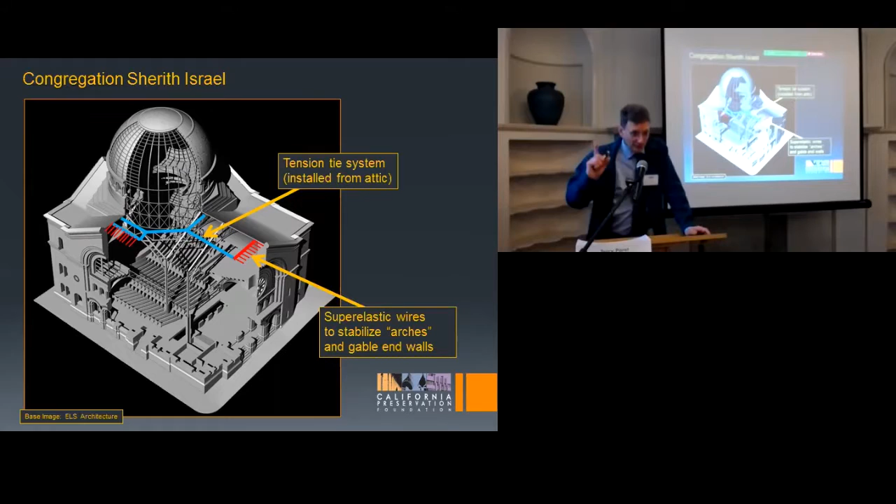Historic structures. But instead of making it out of steel, or entirely out of steel, and instead of running it right across the sanctuary, we came up with a cute little way of running it around the sanctuary, on the outside of all the plaster in the attic space, and using super elastic wires, the first application in the US, to help stabilize these walls and hold them in case they wanted to fall out.

This stuff is actually incredible. But what's more incredible is that now when you go into Sherith Israel and look up, you don't see our work, because it's on the outside of it. It's all on the outside of it. So we did a whole bunch of work up there, but it's up above.

Okay, last piece of this puppy. I wanted to talk for just a few minutes about life safety of non-structural components, because I know that non-structural components oftentimes, in people's mind, drives an awful lot of intervention, even though maybe they shouldn't, strictly speaking, but they do.

So let's chat. Ceilings, parapets, and hollow clay tile. Again, just a phenomenal image of Sherith Israel. This stuff is all framed with wood rafters, and they sit on steel trusses, but they're not really attached. It's just wood, there's a bunch of wood up here, and that wood can actually slide off its supports. In fact, at the exterior walls of the building, the wood sits on corbelled brick that provides the top of the arch.

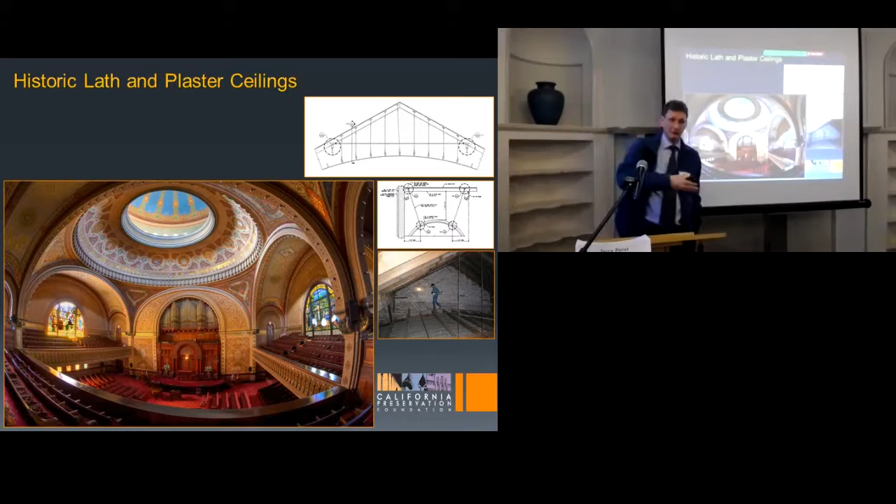We don't want that stuff to slip off in an earthquake, because as the walls are trying to move, as the whole structure is breathing, the supports for that wood, in a lot of cases, have only an inch or two of bearing. So we simply devised some systems with wire rope. It's kind of shown schematically here, these are details off our drawings, just hanging wire rope from the roof structure to these rafters. We strengthen the roof structure.

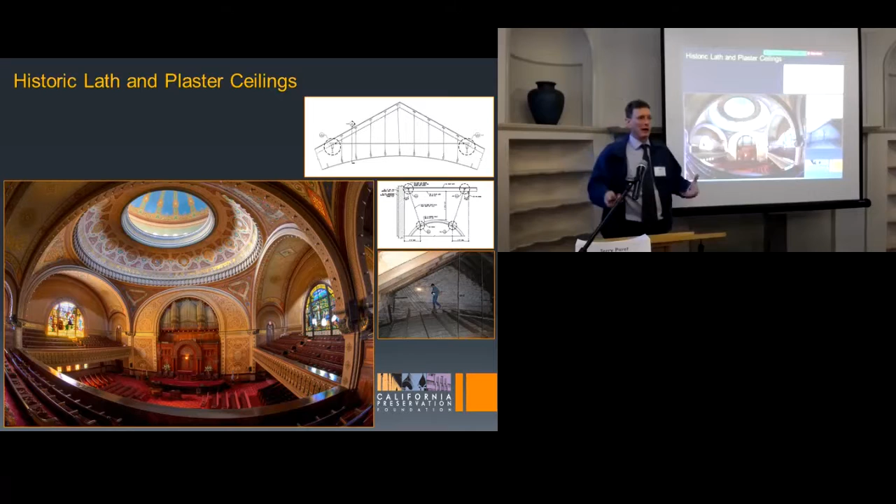We turned what are just regular gable rafter framing, by putting in a $5 piece of threaded rod, into a truss. Now if the ceiling were to slip off, it won't drop down, which, as you can imagine, if any of this stuff dropped down, you'll never get it back up. So this is kind of a belt-and-suspenders approach, but it's a good way to protect against a potential life safety problem. Parapets.

Hibernia, the roof was a forest of red iron parapet bracing when we first got there. The owner actually wanted to repurpose the roof and use it, put it into the use of the structure, and build a deck up there and everything. And this stuff was really unsightly. And it really is unsightly.

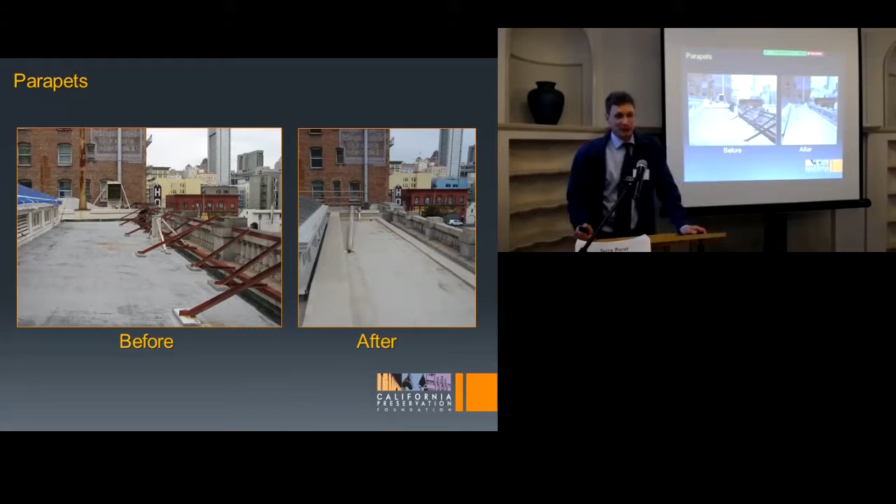I always hated that stuff. I hated climbing around that stuff, and it's not pretty.

Okay, last subject, hollow clay tile. There's a dilemma with hollow clay tile, of course, because we all know it presents a hazard. In Loma Prieta, in San Francisco and in Oakland, tremendous damage was done to hollow clay tile. Hollow clay tile partitions fall out in stairwells. They create all sorts of secondary risks. Problem is that hollow clay tile is oftentimes the backing for character-defining features. So we have a conundrum: how much damage do we want to do for the sake of protecting occupants?

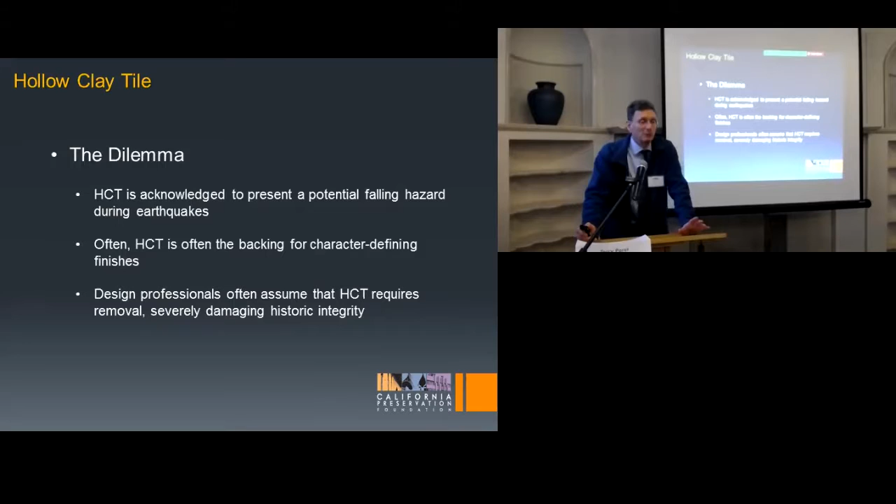Oftentimes people assume it requires removal, but it doesn't. Nothing in the CHBC requires you to remove them. According to the San Francisco Building Code, you can mitigate hollow clay tile, but mitigation does not require removal. Mitigation, in my view, is mitigation. I'll show you a couple of mitigation techniques in a minute. The City of San Francisco also only requires that HCT hazards be mitigated for egress and passersby, so you don't have to go in wholesale and mitigate every HCT problem in a building.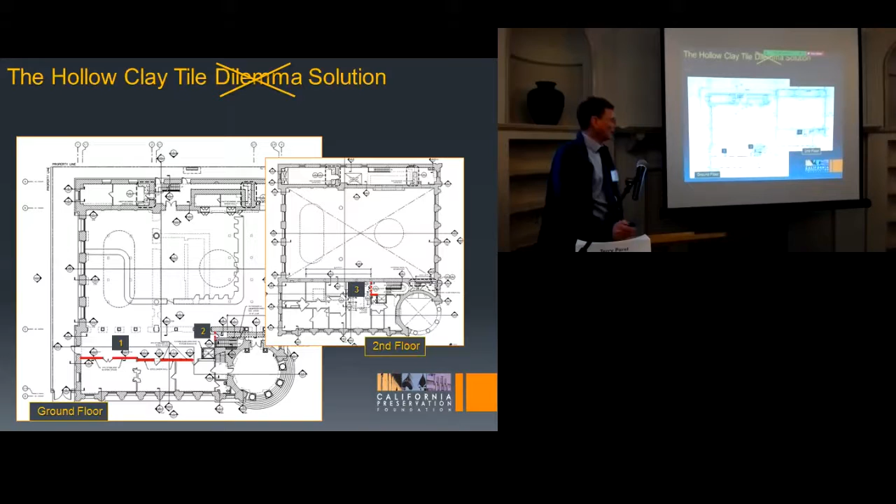Unfortunately, behind the hollow clay tile, downstream from that wall, this is one of those rooms, and actually there are three rooms that are very similar. My goodness, you really don't want to take those walls out, do you? You'd forever damage this thing. So we didn't. But we had to do something about them, and it was driven by the City of San Francisco. By the way, yes, these are two-wythe walls.

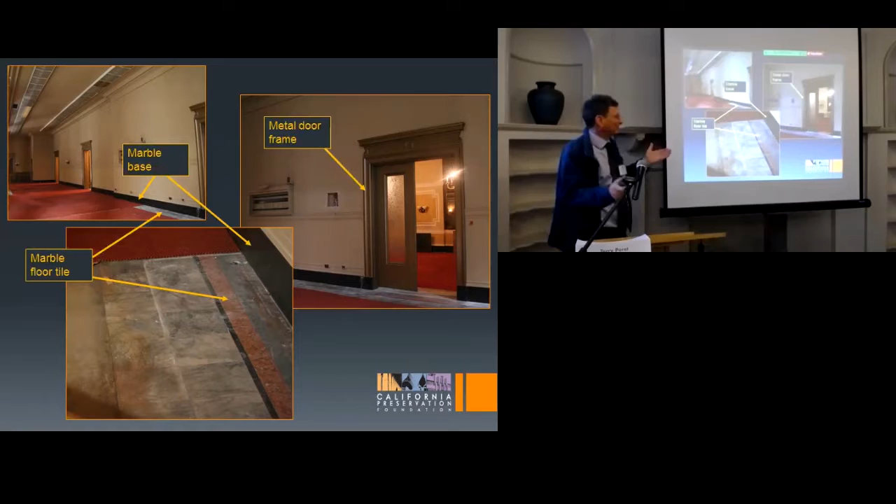Down at the end of this corridor, that window is going to be converted to a new exit to accommodate the new occupancy, so we really had to work. We had to do something here. This was the egress. To complicate matters, we had these very lovely metal door frames that were the same thickness as the walls. We really couldn't change the wall thickness. We had some very lovely marble tile bands, and we didn't want to intrude on those things.

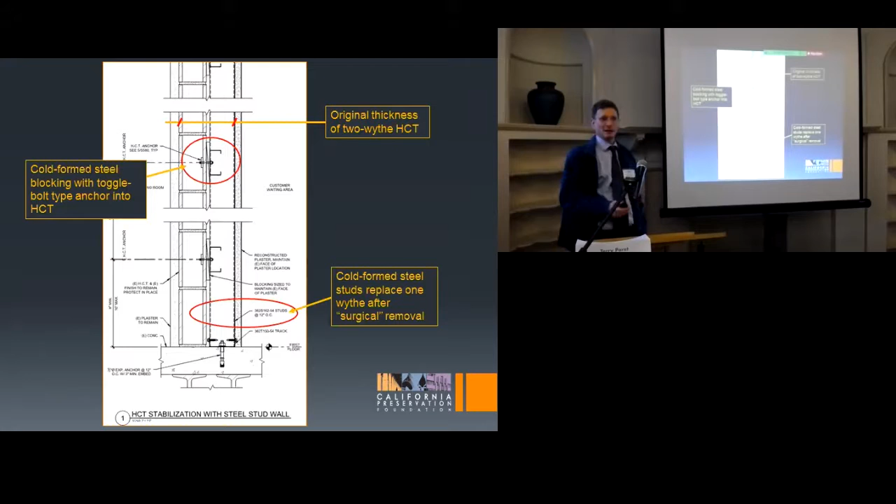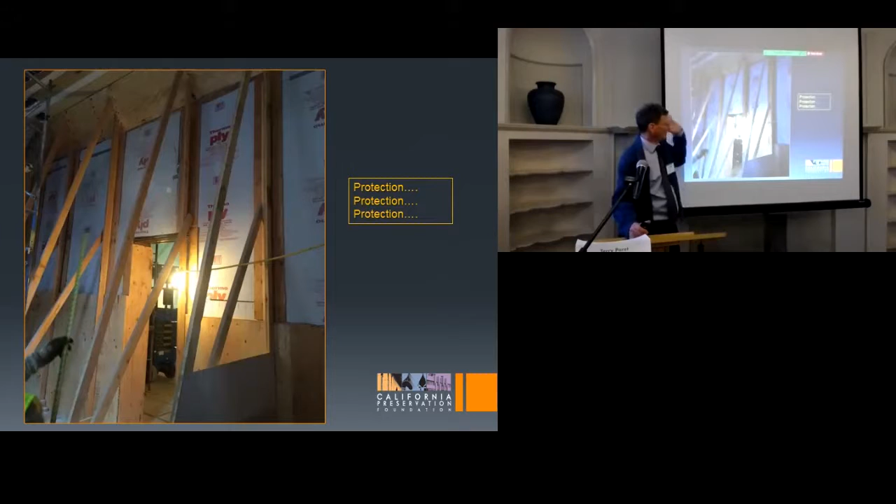So we developed a potentially risky means by which we said, look, if you guys can surgically remove one wythe of HCT, one of the two wythes—surgically remove it, meaning don't get the gorillas out there, get the guys who care—and replace that wythe with cold form steel studs and run some toggle bolts from the HCT into the studs, you've now supported the wythe you want to leave. That's exactly what we did. First, they went into those really fancy rooms and braced the snot out of those walls and protected them. Then we went on the other side, and they surgically removed it without making a single crack in the adjoining wythe. It was phenomenal work. This can be done.

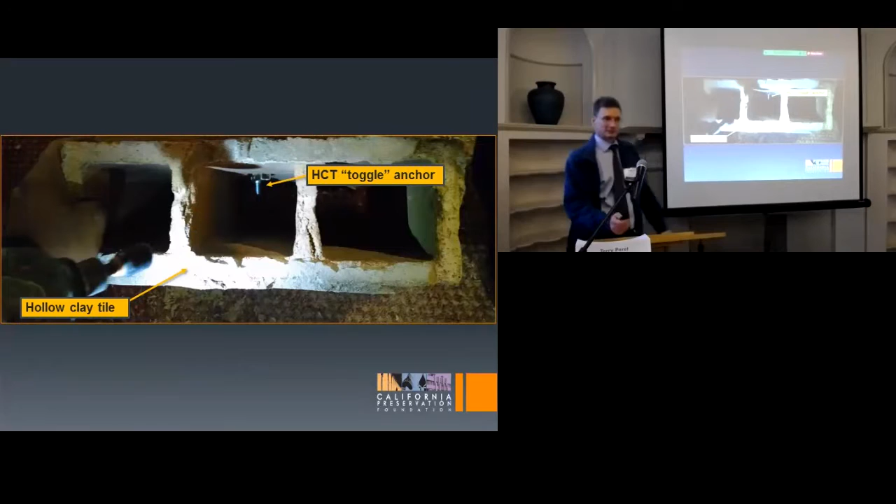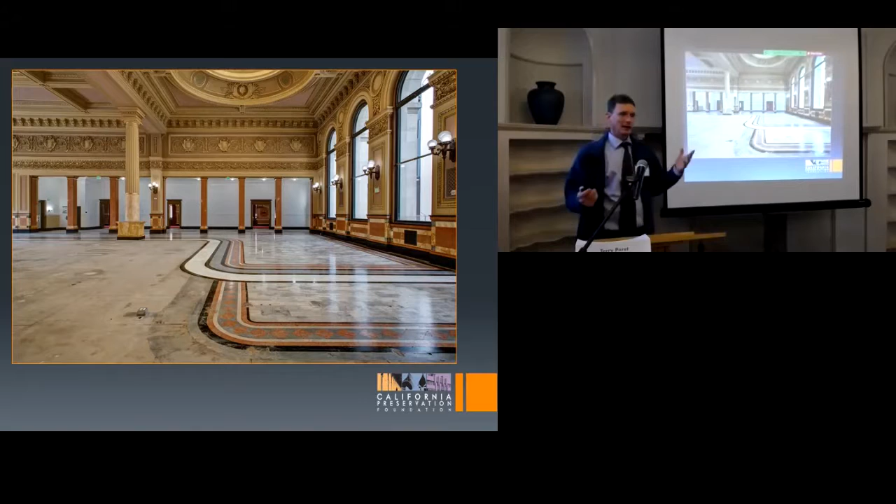They put in those steel studs, tested that the HCT toggle anchor would work and how to install it, and ended up doing that the whole length of this egress, stabilizing all of it. Part of it we put in a cold form steel shear wall, and also didn't intrude on the marble tile—that was also, I think, the first use at least in the City of San Francisco of that technique. But in any case, this back here, that white wall you see—I probably would have chosen a different color for it—that white wall is the wall we were working on, and it has exactly the same dimensions and thickness as it had when we started.

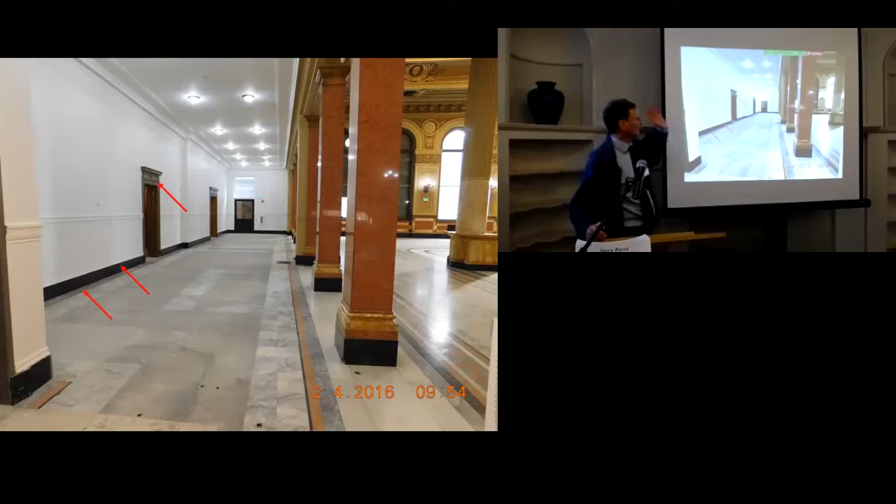We didn't intrude on the marble tile band. The doors all work fine. The door framing, all lovely. Okay, so another area in the building where there was a single wythe HCT wall was also complicated.

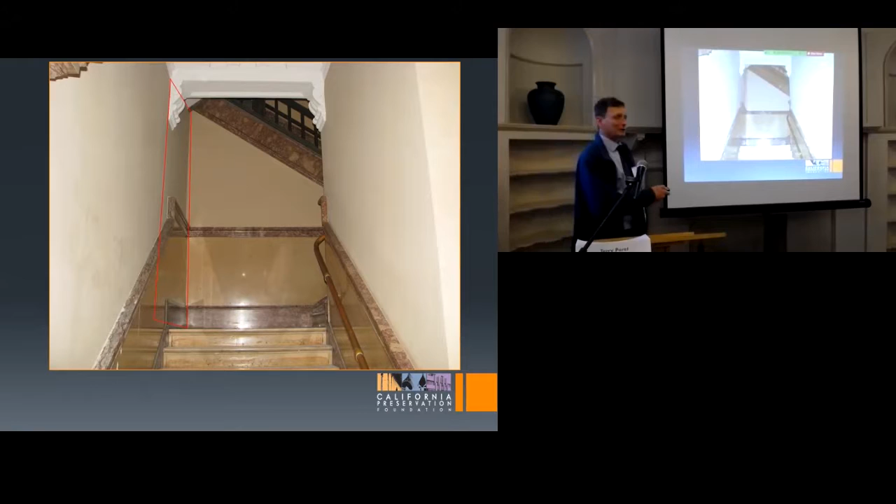You see this dotted red line, there are stairs. That's kind of the line of the stairs behind, which are very decorative stairs. We could easily work on this side, but we couldn't work on the back side. We had some brick walls kind of shaded behind here, and concrete. This is the stairs in the back side with really lovely stone wainscoting, and we just didn't want to touch it. But this single-wythe HCT is kind of right next to the elevator, and this is a path to stairs. This is also kind of in the egress.

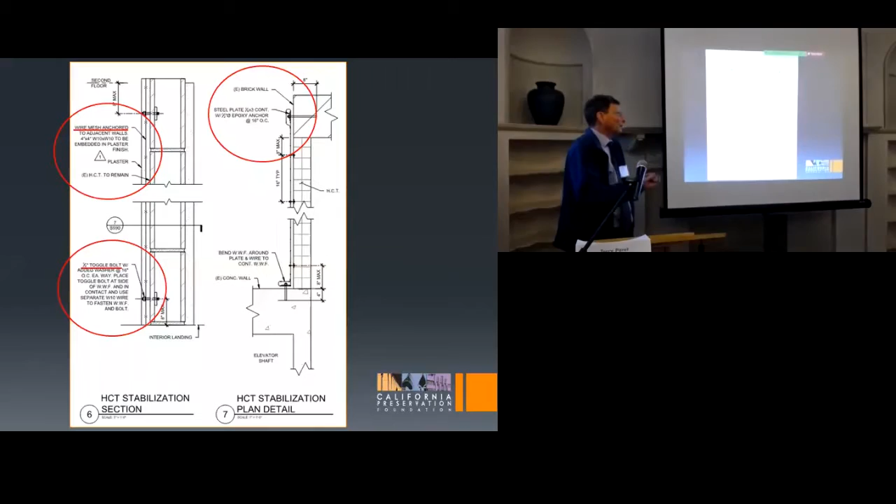So we just simply came up with a simple solution: put wire mesh on the face of that material, anchor the wire mesh to the HCT with toggles, and then on the ends, anchor the wire mesh into the brick and into the concrete, and it just stops it all from falling out. It may well get damaged in an earthquake, but it's not going to fall on people, which is really the goal, and it left all those finishes intact, at least the nice ones on the back side.

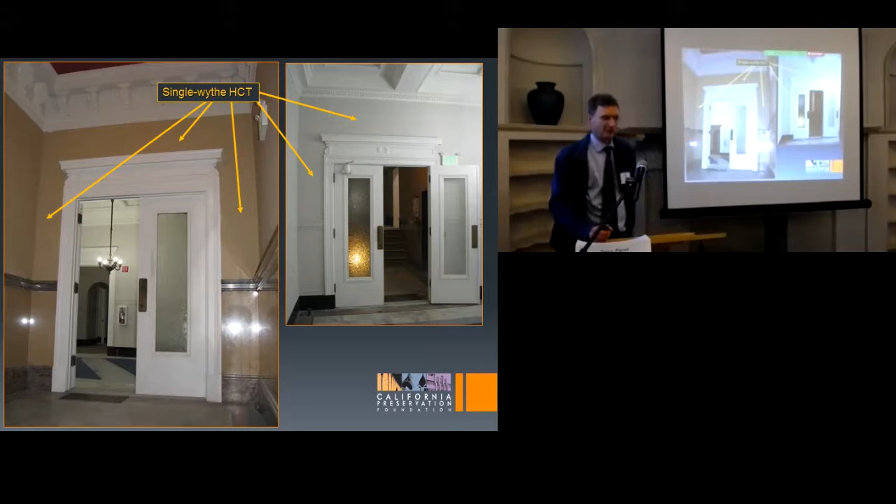Lastly, the last solution type I'll show you pertains to these HCT walls, which are also in kind of an egress route that were single-wythe. Above here is the attic. This is what it looks like from the attic. These are the hollow clay tile blocks that project above the ceiling. Well, these are perfect avenues for fishing down a reinforcing rod and filling with grout.

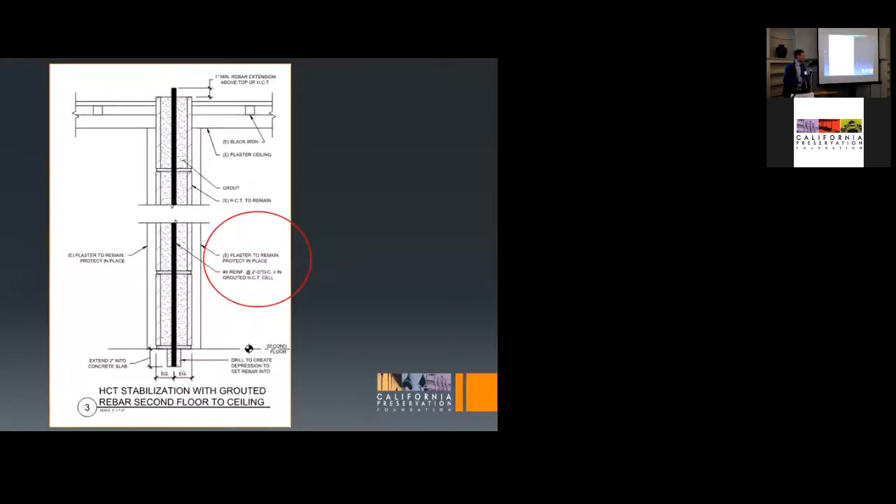So that's what we did. Every 2 feet in the portion of the wall we had to, or right at the jambs, we simply fished down some reinforcement and grouted it with a low bleed grout so it didn't damage the plaster finishes. And now these things are stabilized, and we never really tore them out. And there's an image of it.

And so now is the summary, which you can read it. I'll read it. The point of this talk really is that structural provisions of the CHBC provide a tremendous basis for us. This is our armor. This is our weaponry in fighting the battle of how do we preserve historic buildings. It permits preservation and seismic safety to be treated as equals, and that is exactly how they should be treated. It allows us to capitalize on historic strengths of historic structures, of inherent strengths of historic structures. But in doing so, it's important that everybody on the project team buys into the notion that it's important that we reutilize the inherent strengths in these buildings.

It's a hugely important concept because it can vastly reduce the amount of intervention that would otherwise be necessary. Moreover, we should all be adopting this notion of supplement, don't supplant. It's kind of a Terry Paret shorthand, but again, it's very important. We have to be committed to targeting only critical vulnerabilities and not trying to remake the wheel when we work on historic buildings. Thank you.

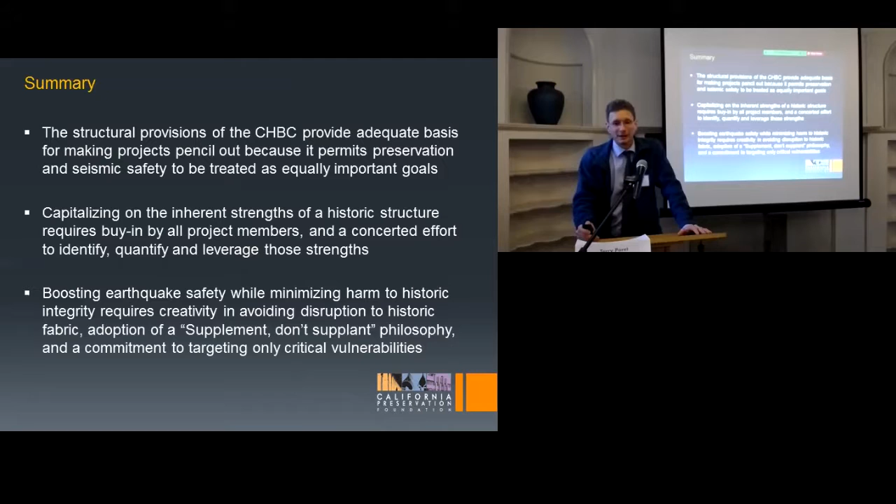Okay, we have time for some questions.

Hi, Terry. Thanks. Martin Bernstein, City of Palo Alto Historic Resources Board. You talked about the buy-in of the team members, including building officials. If the owner or owner's representative says with a qualified historic structure, we want to use the California Historic Building Code, building inspector cannot say no. Is that correct? Well, he can say no, but he would be wrong to say no. Okay, because the state law says that if the applicant says, I want to use this code, it has to be used, correct? That is my understanding, yes. Okay, good, okay. So I guess my follow-up question is, is there any training from the state of California that the chief building officials in California know that?

It's a great question, and it gets right to the heart of a problem that we all run into on our projects. The first person on the board is Dan Chudy. Dan used to be the building official. So on the other side, he gives seminars on the CHBC to CALBO. So we're finding more and more building officials, while they may be reluctant to use the CHBC, understand that they need to use the CHBC if requested by the owner. Don't expect them to pick it for you. That's one of the things that as building owners or city representatives, you have to know they're not necessarily going to volunteer. You need to ask for it.